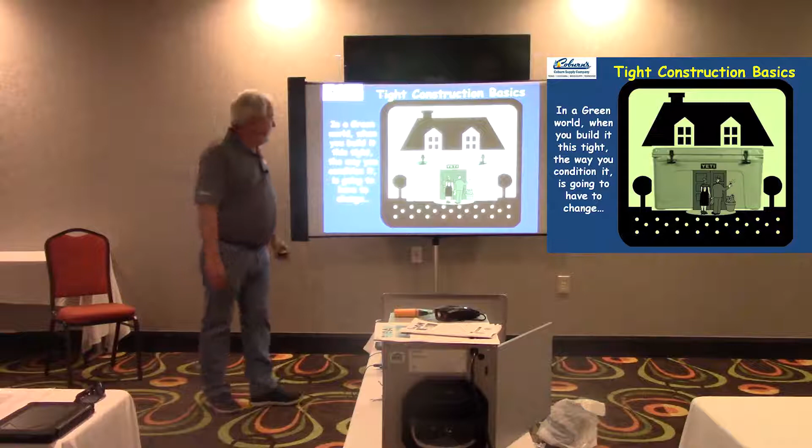All right, tight construction homes. When we start building our homes like a Yeti ice chest, the way we condition that home has to change. We can't do the same thing we've done in the past. You start living inside of a Yeti, and it starts getting nasty pretty quick if we don't do our jobs properly.

We're in the HVAC business, is that right? Heating, ventilation, and air conditioning. How often have we been doing that ventilation part, the V part of HVAC? We haven't been doing a good job with that part. I just want you guys to understand that. So if we're not doing the V part of HVAC, that means we're just hacks—oh no, we're not hacks. That's not what we're going to do.

But let's think about this. If you go out fishing and come home, take the fish out of the ice chest, rinse it out, close it up, and put it on a shelf, after about a month what's that ice chest going to be like on the inside? Mold, mildew, all kind of stuff. But if you take a towel, fold it in half, fold it in half again, and lay it on the edge of that ice chest, close the lid and leave that gap around the top for ventilation—what's going to happen in that ice chest now? It's going to dry out.

So what you're telling me is that the mold and mildew happen from the moisture on the inside of our Yeti, is that right? Not so much the outside, which we were more concerned about in our previous lives—now it's the moisture trapped on the inside that we need to take care of. So you figured out over time that if you fold it, and fold it again, maybe one more time, you have a certain amount of ventilation air required to keep it from molding and mildewing, is that right?

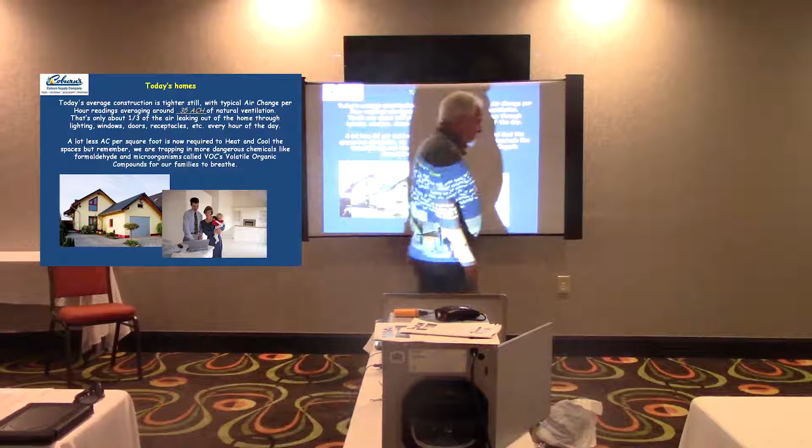Typical home of today, we're down to about 0.35 air changes an hour - about 1/3 of an air change an hour inside that home just leaks in and out. That's what we call the house breathing. That's nice. You start getting into extra tight homes or foam homes, we're down to about 0.1 air change - about 1/10 of an air change an hour inside that home. We're getting tight. Now, I'm a Cajun and I'm not a smart man, so I had to put these numbers together and figure out what this really means to me.

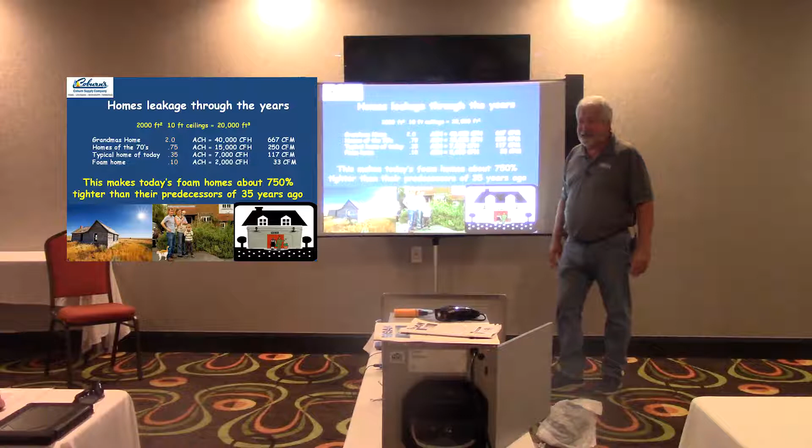So I built one house, 2,000 square feet, 10-foot ceiling. With one home, that's 20,000 cubic feet inside that house. If Grandma's home leaked 2 air changes an hour, that's 40,000 cubic feet an hour. Divide that by 60 minutes in an hour, that's 660 CFM.

That's a 1.5 ton blower in Grandma's window blowing 24 hours a day, 365. Is it any wonder we had to put a 3-ton window unit in that little 800 square foot home just to take care of the living area? We had to oversize air conditioning dramatically just to compensate. The only way we're going to be able to change that is to identify it with a blower door test, and we'll cover that here in just a few minutes.

So how can I change that natural ventilation rate? Well, wind can change that. If I have a prevailing wind blowing against a stick construction home, it might leak through the sill plates, the windows, around the doors, all of those places, because the wind's pushing on there. What you've got to get in your heads is for every 1 CFM that goes into that house, 1 CFM goes out. For every 1 CFM that goes out, 1 CFM has to come in. Remember that, because that's going to be huge.

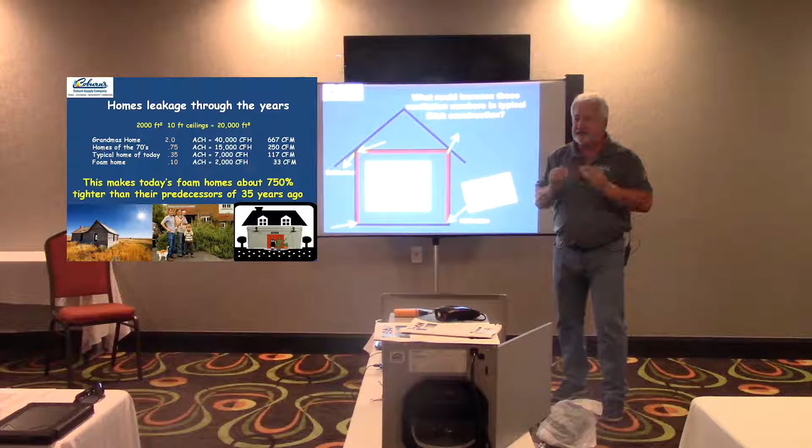As we start tightening up these homes, what happens to the size of the air conditioning system? It goes down. Our tolerances are getting less and less. We don't have that extra tonnage to take care of stuff anymore. It's going to get more and more critical. The wind, as it's blowing in, is pushing it out, so it's going to increase that leak rate.

Exhaust fans. If I start turning on the bath fan, there's 50 to 80 CFM. If I have 50 to 80 CFM going out, that means I have 50 to 80 CFM coming in.

Let's turn on can lights, especially on the 2nd or 3rd floor. Heat travels from hot to cold. As that heat rises up to the 2nd or 3rd floor, it runs right through those can lights. You know the can lights I'm talking about, where you're standing up in the attic space looking at the can light, what do you see? You see the floor, absolutely. You can get about 30 CFM through a can light, and some of these homes have tons and tons of them.

Attic accesses, you know how leaky those are? Heat travels hot to cold, moisture travels wet to dry. It's pushing everywhere. The dryer is something that's not thought about very often, but it's huge.

How many of you guys got kids at home? When does the dryer shut off? Never. So if it's not shutting off, that's 200 CFM being exhausted out of the house. If I have 200 CFM being exhausted out, that means I have 200 CFM of hot, dirty, humid air coming in. The home naturally breathing, we said, was 100 CFM. Now you turn on your dryer and you've doubled the amount of moisture being brought into that house.

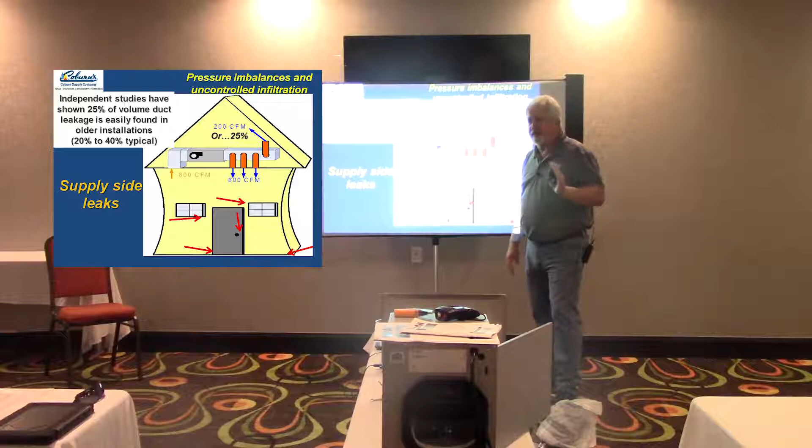Pressure imbalances can come from the ductwork. This is where it all started. Independent studies have shown 25% duct leakage is typical. We found 20 to 40% typical down the East Coast and West Coast. It was just phenomenal, the amount. If I have a 2-ton system with 4 ducts, and one of them is completely disconnected, that's 25% duct loss.

We wouldn't stand for this if we walked into the attic and saw this. But because they're all small holes everywhere, we've been letting it go for years.

So 200 CFM blowing up into the attic means I have 600 coming in the house, 800 leaving the home. If I have more leaving than coming in, the home goes into negative pressure. The home sucks, absolutely. So the fix is to put 800 CFM in and take 800 out, because our air conditioner doesn't make air, it just circulates the same air over and over again.

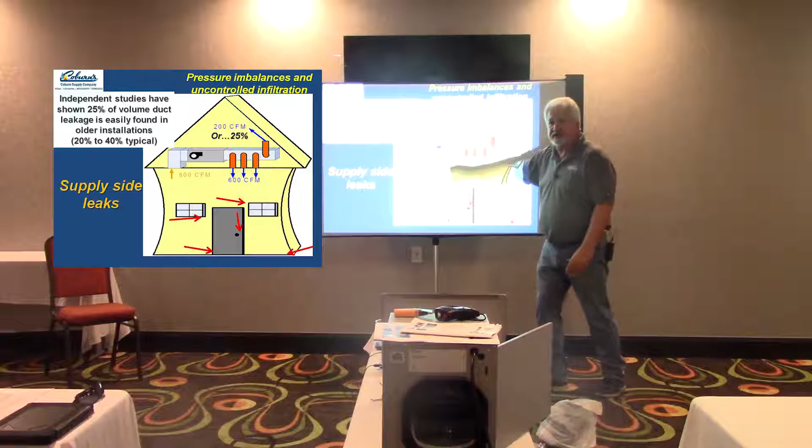If we had this same situation on the return side, let's say I have 100 CFM of leakage around a return joint, I'll take 100 from there, I'm only going to take 700 out of the house. If 700 comes out of the house and 800 goes in, the whole home goes slightly positive.

So if it's going positive, it may be good, it may be better, but I have to be very careful of where I take my makeup air from, or my ventilation air from. I don't want to take it from a 140-degree attic. Does that make sense? Good.

Which one would produce dust inside the home? A negative pressure home or a positive pressure home? I'm positive it's both, because if I'm in a positive, I'm sucking the dust in from this spot. Is that right? If I'm in a negative, where am I sucking the dust in from?

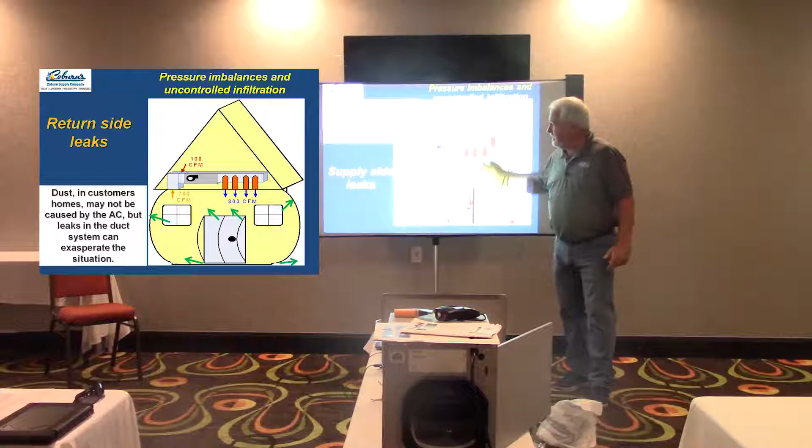Both are going to produce dust. The air conditioner doesn't produce dust. It's just that when they shut those doors, the air conditioner blowing into that room now makes that room go into a positive pressure. If that room goes positive, it's going to start forcing the air out through those can lights, through the cracks in the walls, floors, ceiling, everywhere. It's going to force air out.

If I'm forcing air out on this side, what's happening on this side of the house? The whole home just went negative. So the entire home is now sucking moisture in and heat and dirt from the rest of that house.

Where do we say we're going to get the air from? We always say, oh, we close the door, so where are we going to get the air back to the return from? Under the door, yeah, right?

Yes sir. So that positive pressure is like, I know in my home if I close the door and it's almost like slightly closed, it's going to close. Absolutely, that's the pressure imbalance. Because if I slightly close that door and I'm pressurizing that room, what's it going to do to that door? It's going to close that door. You got it? Good. So now you can hear it going under the door, right? You know why it whistles? Because it doesn't know the words.

Quit that, all right. So we got a pressurized room. If it's going under the door there, it's going through the can lights, it's going out the windows, it's going everywhere but back to that return. Whatever I lose on this side of the house, I'm going to suck in from that side of the house.

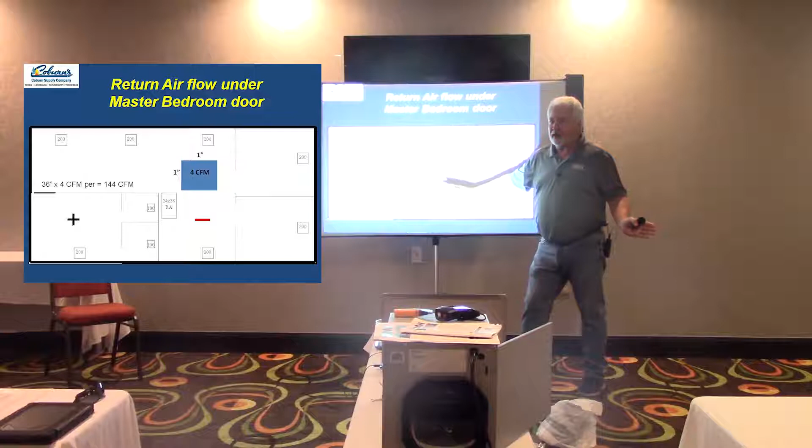Okay, so you want to have a little bit of privacy, so you close that door. But now it's not just 200 CFM going in there. Now I've got the 200 for the master bedroom, 100 for a closet, 100 for the bathroom. I've got 400 CFM, and we said that we're going to have it go underneath the door. Is that right? So we cut the door.

And the industry standard is what? One inch. Yeah, we cut off one inch off of the bottom of the door. I need you guys to understand that one inch is definitely not enough. You know that it's not enough.

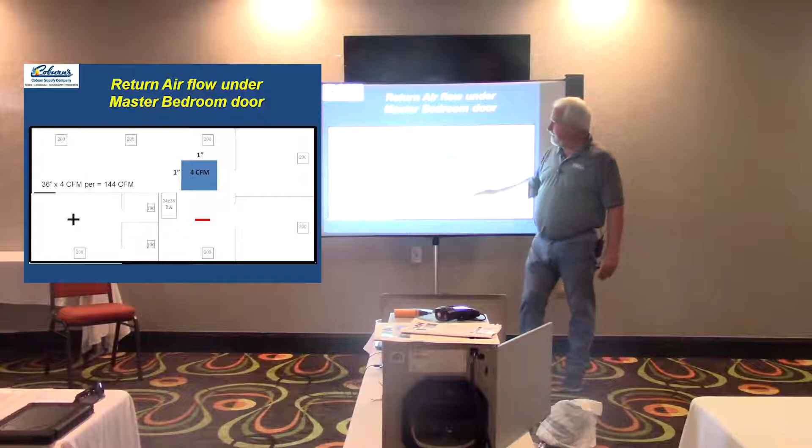But if it's not enough, how much is enough? For every inch you cut off, you're going to get 4 CFM. Real easy to remember: 4 CFM for every square inch. Everybody good with that? So if I have a 36-inch door times 4 CFM, that's 144 CFM. Everybody good with that? If I have 144 that I can get through there, but I have 400 going in, what happened to the other 260?

It all got blown out on this side. If it's all blown out on this side, what's happening on this side of the house? It all went negative. Is everybody getting that? Sucking it in through every crack and crevice on this side of that house.

Every fireplace that we have comes with combustion air. The code says that if you have a masonry fireplace or a manufactured fireplace, you should provide that combustion air. Now we've got a big old roaring fire, and you guys know that it takes a lot of air for that big roaring fire. Do you think I can get anywhere near that much air through a 4-inch duct? No. So the problem is we're putting in the duct, but on every one of those manufactured fireplaces, you know what there's an option of?

A little blower. A blower that provides combustion air that you put right here. You know what's never installed? The blower. So I can get enough combustion air if I put the blower there, but I can't get enough combustion air if I'm just trying to bring it in there.

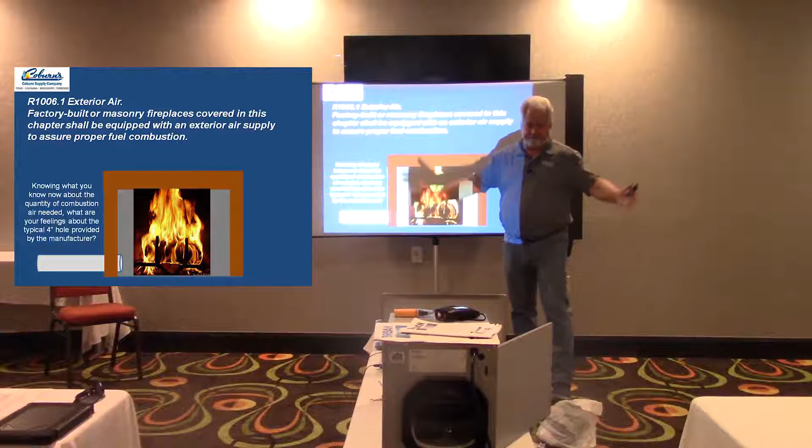It's sucking combustion air. As it's sucking that combustion air into the fire, where is all that air going that I just heated up for combustion? Right out the flue. Is everybody getting that? So if I have all of that air going up the flue, what's happening on the rest of that house?

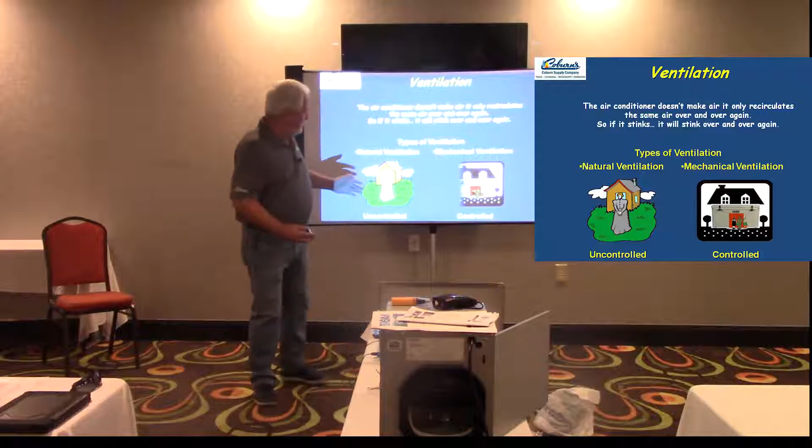All right, so ventilation. We talked about Grandma's home, that being uncontrolled and natural ventilation coming in from everywhere. As we tighten up our homes, whether it's foam or just tight construction, we're going to have to start bringing it in controlled. We're not going to have the house breathe on its own anymore. We're going to have to put it on a respirator, and we're going to control the amount of air going into our homes. Bring it in controlled.

You have to bring in mechanical ventilation when it starts getting less than 3 air changes an hour in the state of Louisiana. So, wait a second, 3 air changes an hour? Grandma's home was 2.

When we start talking about air changes an hour now in the codes, they are talking about using a blower door on the house. So if I take a blower door and set it in that exterior door and start sucking the home into a negative pressure, if I had a 0.35 air change an hour home, naturally just leaking in and out, one-third air change every hour, and I suck it into 50 pascals, 0.2 inches of negative pressure vacuum, what's going to happen to the leak rate?

It's going to go up. It's going to leak faster. Does that make sense? So that 0.35 air change an hour home might be 7 air changes an hour under 50 pascals of negative pressure, under a vacuum. Does everybody get that? Good.

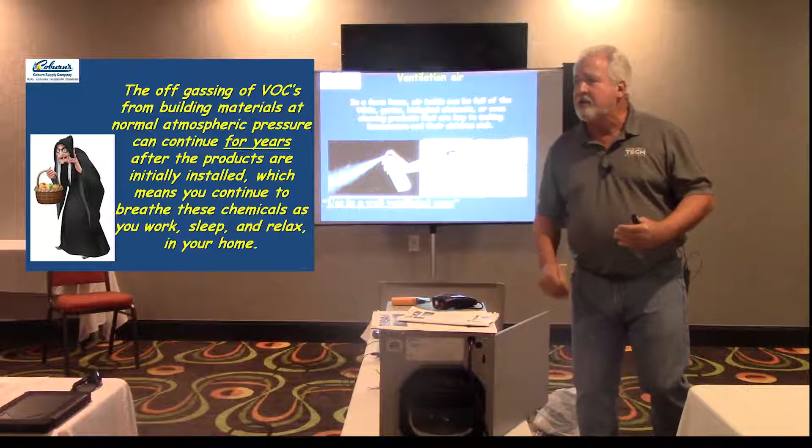People up north have figured this out a long time ago. We're just starting to see it now. Please, please be careful as we go forward. We have to ventilate that home. The off-gassing of these things continues for years, and it's faster in hot environments and humid environments.

Where do you guys live? Hot and humid. So it's going to off-gas very quickly, and it's going to start pushing all of these chemicals inside the house. And it's maybe not necessarily just harmful to you, but it's harmful to the equipment in that home as well. Anybody seeing any of the cans starting to rust out in the attic spaces in some of those foam constructed homes? Oh yeah.

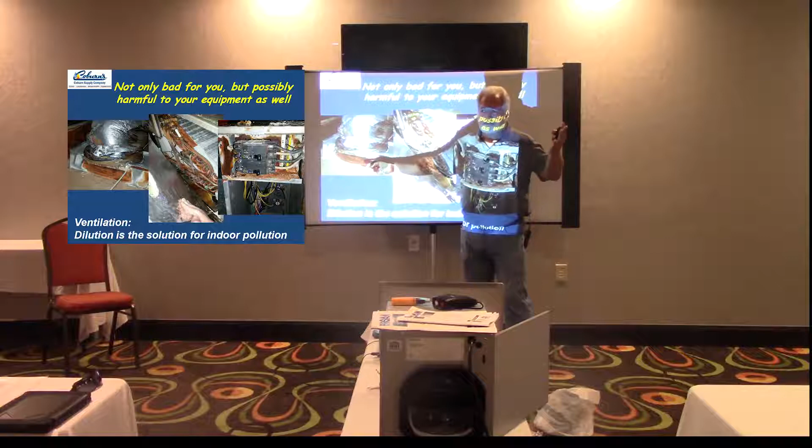So anywhere that it reaches dew point, anywhere that I can get that air leakage down where it's starting to get a little bit of dampness to it, what's happening is the chlorides that are in the home, whether from the chemicals they're using to clean the house, or chlorides that are off-gassing from the VOCs, are going throughout the house. Wherever it reaches dew point, it's rusting.

When does your coil not reach dew point in Louisiana? It's always wet. We're running into coils, you're getting 4 and 5 and 6 coils in a 5-year period. It's not the coil, because you're using the same coil next door in a ventilated home, and you're not seeing the problems. As soon as we start seeing those chlorides starting to come into play, the chloride's in the air, and then it mixes with the moisture, and it becomes chlorine.

And the chlorine is now causing the rusting happening. Nobody's ever seen this happen with the breakers, have we? Yeah, because it's reaching dew point. On the hole, or right there on that grommet where the electrical's coming in, right? Absolutely, it's got to be sealed up. Because otherwise I'm bringing in the moist air, and it's coming right into this cold environment. We've lowered the temperature, reaching dew point, and the chlorine is just tearing up this equipment.

What is it? It has to have the moisture in order for it to start doing damage. What is your body made of? A lot of moisture. So start thinking that one through as we start going forward. I'm thinking that probably you need to start adding ventilation air, and a certain quantity. And how often? Continuous. Yeah, I think continuous.

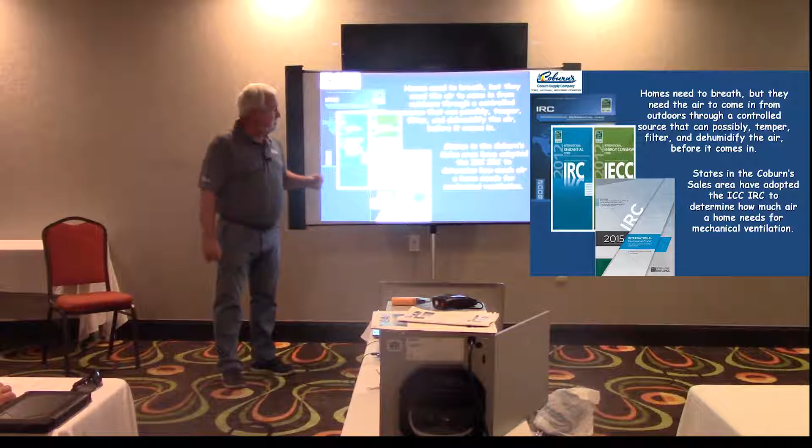Somebody much smarter than you and I decided exactly how much ventilation air you need in a house of this size in order to keep that home from molding and mildewing, and keep the carbon dioxide levels down and the carbon monoxide levels from picking up. They wrote it down in the codes from 2009, 2012, and now 2015. We're still following the 2012s in here and some of the stuff from 2009. In 2015 and 2012, they say this.

The building or dwelling unit shall be tested and verified as having an air leakage rate not exceeding 5 air changes an hour in climate zones 1 and 2. Climate zone 1 is down in Miami, we don't worry about that. Zone 2 is the vast majority of where we're at, so we can't have more than 5 air changes an hour. Upstate Louisiana says 3 air changes per hour in climate zones 3 through 8. What we've decided here in Louisiana is to put the entire state under climate zone 2, so we fall under that 5 air change an hour maximum. That's where we should be - maximum leakage rate of 5 air changes an hour.

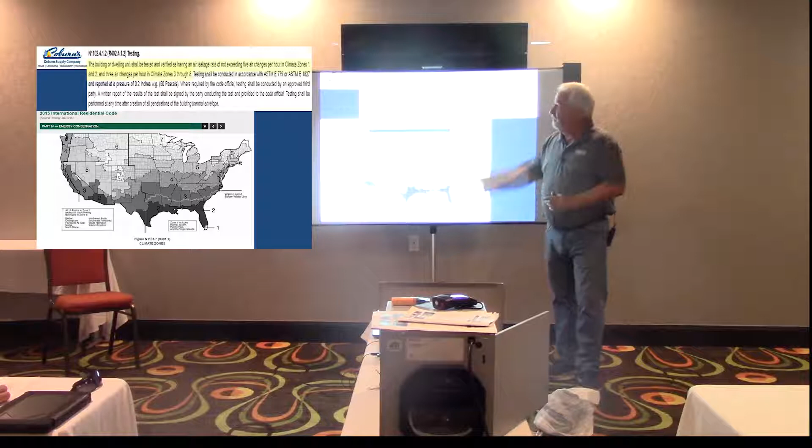But we step back to 2009, and under 2009 we're allowed 7 air changes an hour. So we said okay, we're going to still be able to build the house leaky. Under the 2009 code here in Louisiana, we don't have to have it tested and verified - all we have to do is have the inspectors do a walkthrough and say yep, it looks tight. For them to do that job properly, they need to be on the job site about 7 times during the installation of that stuff. So it's tough for them to do that, but that's part of the code. That's what they're allowed - they either do a blower door or this walkthrough inspection.

So from our perspective, we would like to see a blower door test done on every new construction home. Why? Because you're doing a manual J saying the house is going to be this leaky - I know it's going to be 7 air changes an hour maximum in this house, so I'm going to do my manual J on the front end and size my air conditioning to my home. But if they don't do a blower door test, they could be at 9 or 10 air changes an hour. It could be leakier or it could be tighter - so we don't know what our leak rate on that house is, and we don't know what size air conditioner we need to put in. So we're trying to say, let's please put a blower door on every new construction home so we can set it and everybody knows what we're dealing with.

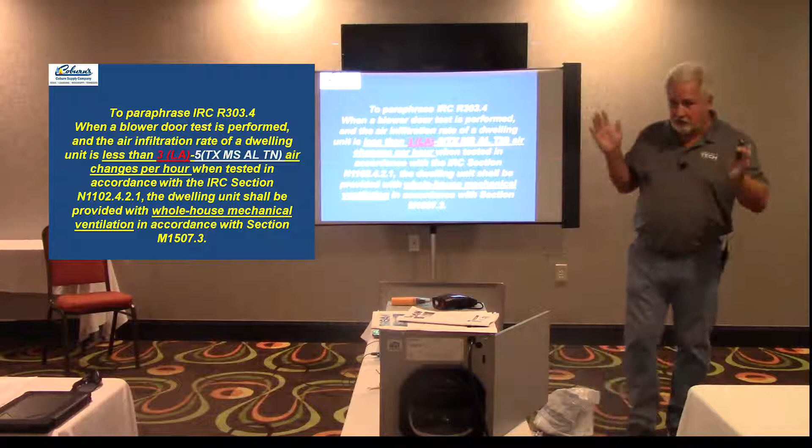So then it says, if you're doing a blower door test on the home - and Louisiana changed it from 5 to 3 - and the air infiltration rate is less than 3 air changes an hour, you have to provide mechanical ventilation. A typical foam constructed home would fall out at about 1 air change an hour, so you'd think every foam constructed home would require mechanical ventilation. Doesn't necessarily fall that way, but that's what you'd expect. So if we're getting into those tighter homes and it falls out at less than 3 air changes an hour, you're required to - but you don't ever know that until after the job is well under way.

So this is all discussion that needs to happen on the front end. I'm going to provide mechanical ventilation because I believe you guys are going to build a tight construction home, and it's going to be less than 3 air changes an hour - I need to provide that ventilation air. Because if I don't provide that ventilation air and that lid stays closed on that home, what's going to happen inside?

Mold and mildew, right? That's the biggest problem we have. Going into a house, you don't know if it's foam. You're doing a rough-in on it, you have no clue until you go back to the final to find out that the whole house has turned into an ice chest, but they're only bringing in 4 inches of outside air, and there's no mechanical ventilation in the house except for a fart fan, a dryer, the kitchen hood, and a fireplace. That's the only ventilation you have in this home.

And it's getting even worse because now they're putting exhaust fans in the laundry rooms with dryers, so all the conditioned air you dump into the laundry room is getting sucked out, plus the rest of the house, out the door, because there's not enough air coming in to supply an exhaust fan and a dryer.

Same problem with us too, because you go sell them air conditioning and they change the foam. You're already stuck in it, you got to sign a contract, so you have a problem. Now we're all understanding, so that's what I'm saying.

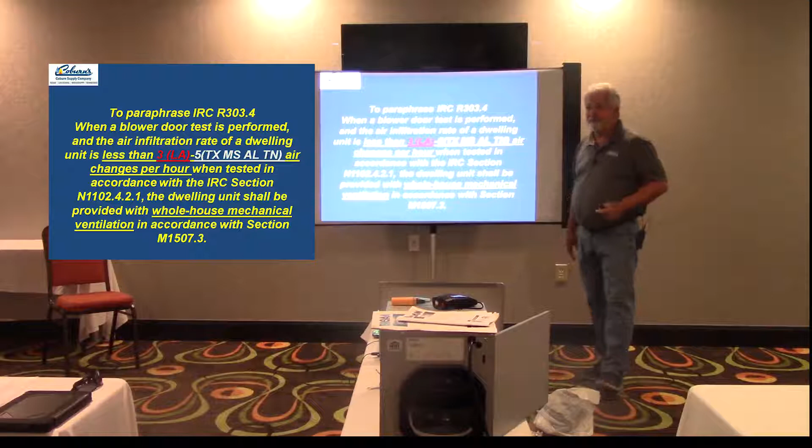We're going to talk. We're going to talk, because that blows my budget out. Good, we're going to talk about all the options we have going forward, guys.

So what is code? Code is the minimum that we have to do, right? This is insurance. The code is the minimum, and air conditioning contractors are responsible for all mold, mildew, and everything that ever happens inside of somebody's house. Is that right? Correct. It's always us because we got the biggest insurance policies.

That's how it works. So understanding how to prevent it, how to talk about it, and how to get codes actually amended is your responsibility. So we need to get you guys all talking the same talk.

So the blower door, it's called the envelope test. We're going to take the exterior of that home and seal it up as tightly as we possibly can. We're going to suck that air out down to 50 pascals of negative pressure, or 0.2 inches of water column. And when I do that, if I'm sucking air out, that means I must have leakage coming in. Is everybody okay with that? So the more leakage I have coming in, the more I'm going to suck out. It's just how it works.

So if I find out that home is 7 air changes an hour, 5 air changes an hour, what if it's only 3 air changes an hour? What am I now required to do? I have to bring in a mechanical ventilation system. Absolutely.

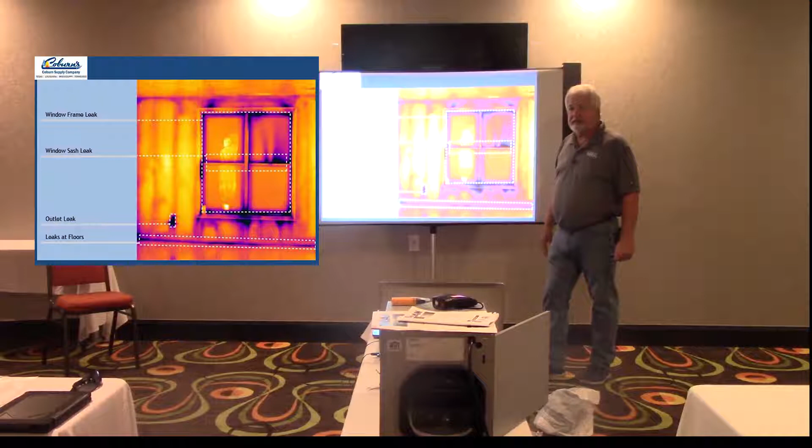You're seeing it's being brought in there as well. So by using thermal imagery, I know where the heat is either coming in or leaving, and at the same time, I'm also able to figure out if heat's coming in, dust is coming in, and moisture is coming in as well. Is everybody getting that? Cool.

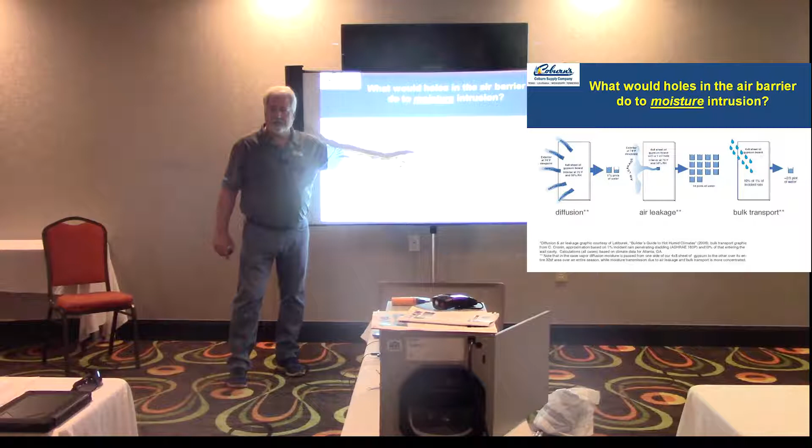Okay, so let's compound that. Now you have these 1-inch holes everywhere in your house, and let's make that house go negative. What happened to that 14 pints of water? It went up dramatically. Is everybody getting that? What did we do to the size of our air conditioner on our newer homes? Went down. The moisture removing capability has been reduced, but the moisture we're fighting now is inside that house.

Is everybody getting that? So here's the rules. And the problem with the rules is people typically only read the first one and then they run away. So here's the dig. The first one says system design.

It says outdoor air ducts connected to the return side of an air handler shall be considered to provide supply ventilation. Okay, so it's saying if you just take a duct and tie it to the outside and to the return, you're good to go, right? If you stop there, that's what we're seeing out there in our industry.

Problem is you have to read the next two codes. The next ones say you have to have controls that enable a manual override and a method of airflow adjustment. So we have to have a damper in there to control it from 60 to 80 to 90 CFM, manual adjustment, and we have to have controls that can turn it on and override it. Does that make sense? Okay.

The next one is the more important one. It says provide outdoor air at a, what does it say? Continuous rate. What does continuous rate mean? When does continuous rate turn off? See, that's what we read up here - when the air conditioner shuts off, ventilation shuts off. Down here it says it doesn't shut off. Continuous ventilation.

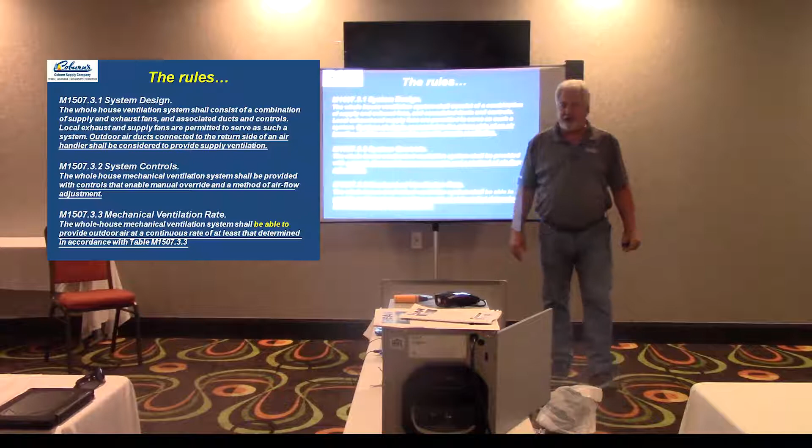Now that would be like saying, oh okay, well we can get ventilation when we want to. So we'll open the lid for Grandpa for a little while, but then when we feel like we want to shut it down, we'll just shut it down. I mean, we'll wait for him to get sick, and then we'll open it back up again. Is that making sense? That's what we said in the state of Louisiana because we added this. Instead of shall provide, we added shall be able to. Shall be able to - when we say shall be able to, that means you have to put in a ventilation system to be able to have that air for Grandpa, but you can turn it on and off whenever you feel like it.

You have to provide that. Who's going to turn it off and take responsibility for Grandpa? But that's what the state's telling us we can do now. So I just need you guys to understand why 'be able to' was added - so that we wouldn't be bringing in all that humidity, because if you bring in humidity, what else do you have to put in? So do you think somebody was concerned about how much it's going to cost to build that house? That's why they put this in. Okay, so I'm fighting that right now at LSUCCC.

All right, so does everybody understand what the codes are actually saying here? The problem is we've been just taking that duct and slapping it on the return side of that system. When the unit cycled on, we brought in fresh air.

What did we do to the runtime of those units when I tightened up the home and now have less requirements for air conditioning? What did I do to the shoulder seasons? I don't have the runtime during the shoulder seasons I had before, is that right? So if I don't have the runtime of the shoulder seasons, I don't have the ventilation happening. Does that make sense? Are we still producing humidity inside the house?

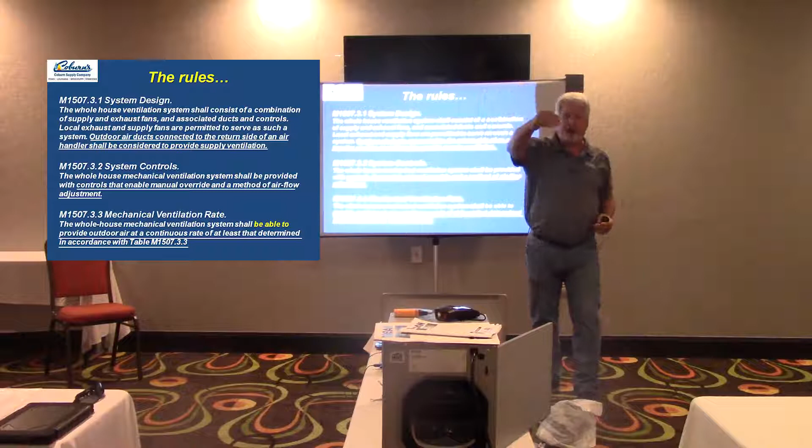That's really it, it really is. And so that's why we're having these conversations. Because if you keep a dehumidifier running 365 days, you're still pushing CFM into the house without it coming out. But I have to, right? But I have to - is it coming out? If I bring in air through a dehumidifier or through some sort of ventilation system, if I'm bringing air into that house, is it going out? Yes. Is it? It's going out through the dryer vent. Right, when you exhaust. It's going out through the bathroom vents. Absolutely. So as I pressurize that house, going to a positive pressure, it's still going to find its way out. Every CFM that I bring in goes out. Yes. Cool. All right, so how much?

The code says go to M1507.3. M1507.3 says if I had a 2,000 square foot home with 3 bedrooms, I'm required to bring in 60 CFM. Now remember what I said about that typical home - that 0.35 air changes per hour was about how many CFM of breathing? About 100 CFM. Remember that? I said a typical home breathes about 100 CFM. So what we were comfortable with it breathing 100 CFM, now we're saying, oh okay, but if we bring it in through a controlled source, we're down to 60 CFM. So we're not bringing in as much as we had leaking before.

If I had a 4,000 square foot home with 4 bedrooms, I'm looking at 90 CFM. Is everybody okay with that? Good, all right. So that's telling us exactly how much we have to have. It's telling us exactly how many folds I have to have in that towel to have just enough air to keep that mold from growing inside there.

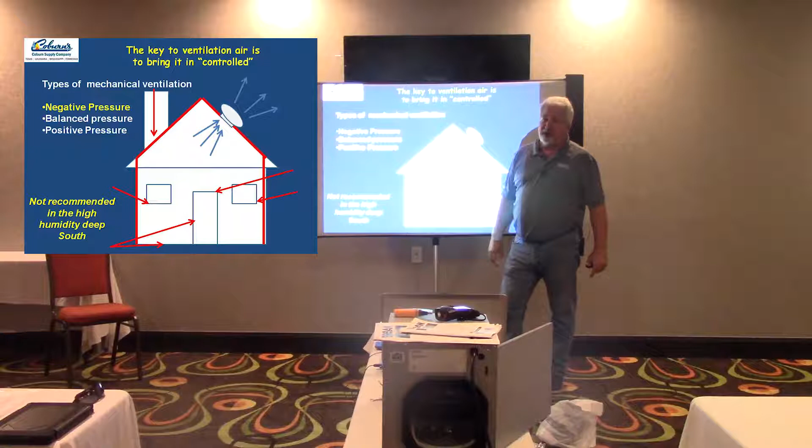Let's think about negative pressure ventilation. Let's call this a tight home, and we have 60 CFM being exhausted out of that house. Where did I get 60 CFM? If I'm exhausting it out of that tight house, where am I getting 60 CFM? Every penetration, around those windows, around those doors, around those bathroom ventilators, around everything. Is everybody getting that?

Well, here's the problem. If I'm sucking it in around that window casing, and this is, let's call it an open cell foam house, I'm going to take hot, dirty, humid air and run it along the side of that window or door casing right next to that open cell foam. What do you know about open cell foam and moisture? Like a sponge. So I am running moisture across a sponge.

How often? Continuous. So that moisture is going to start to build up into that open cell foam until 3 years, 4 years, 5 years down the road, it is saturated enough to start now producing mold and mildew. Is that right? That is why we're not dealing with negative pressure ventilation inside these homes.

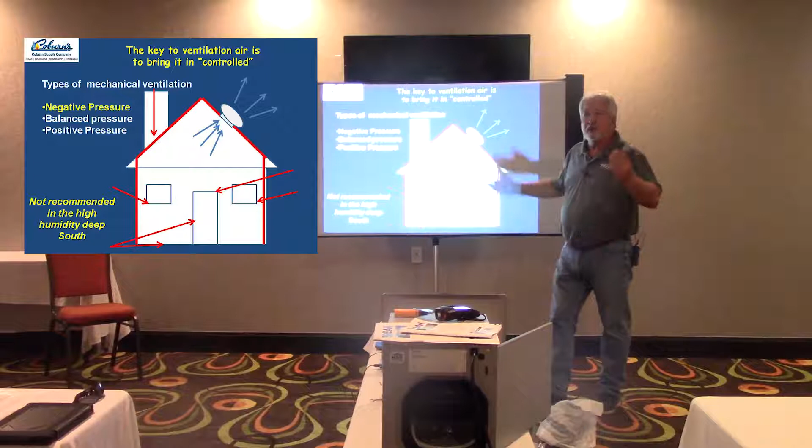Gentlemen, let me ask you this. What is a kitchen hood? What is a dryer? What is a bathroom ventilator? Ah, okay, so all of these things are negative pressure ventilation, and that's what's happening in our deep south. We just made the air conditioner smaller. We're using all forms of negative pressure ventilation. And when we do that, huge amounts of humidity are being brought into the home with the air conditioner not being able to compensate. Is everybody getting that?

Balanced pressure, exhaust fans are negative pressure. We're going to have to start controlling the moisture at its source. When do you typically turn on a bathroom ventilator? And then they turn it off. When you get out of the shower and it's filled with fog, is when we typically start seeing that the fan gets turned on.

Now, if it's filled with moisture, remember, heat travels from hot to cold, moisture travels from wet to dry. You have this whole room full of fog, and it's the master bathroom. What's adjacent to the master bathroom? Master bedroom. So if I have this fog and it's wet inside that master bathroom, where is that fog going to go?

To the driest thing inside that room, which is the master bed, right? Sucking it into the sheets, sucking it into the mattresses, just sucking it all in there. When do you turn off that bathroom fan? When you leave, because mama slapped you on the wrist and said turn off those fans, turn that stuff off.

Gentlemen, we have to start making conversations, start having recommendations and saying, look, there are ventilation fans out there with humidity controls on them. As soon as you turn on that shower and the humidity starts hitting it, it's going to automatically come on and stay on until the humidity drops back down again. So you can leave the room and know that it's going to cycle back off. If they already have existing fans, the controls are able to replace the switches on most of those fans, so you can get humidity controls from there.

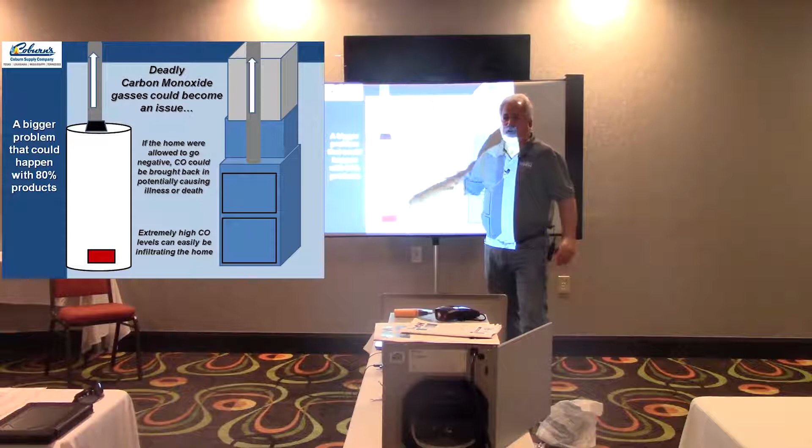Because right up at the top, or right down at the bottom, there's usually rollout switches. So as it starts bringing that hot gas back down, that rollout switch trips, right? That limit trips and shuts down the water heater. The plumber goes back out there and he resets it or he replaces it, right? He does that 2 or 3 times under warranty, is that right? Then what happens after that?

You know what happens after that. What happened? He unplugs it. He bypasses it, right? Because it's just a nuisance trip. The whole time we're sucking carbon monoxide back into that home. And it was fine as long as it was grandma's home, but now we're in a tighter home. In the tighter home, where does that carbon monoxide go?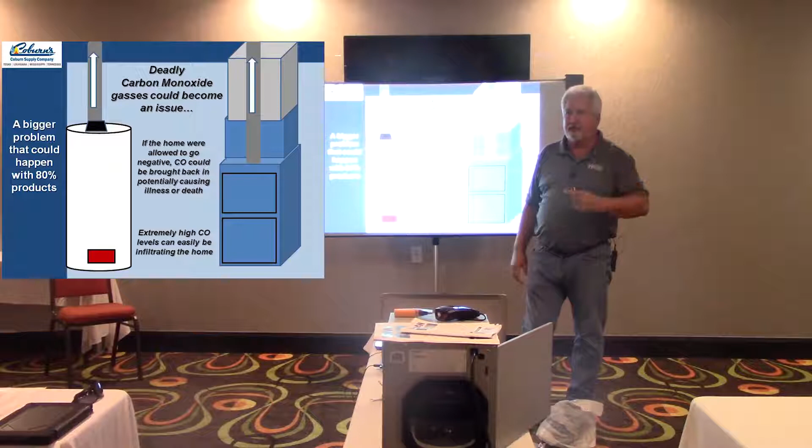Over and over and over again. Is everybody getting that? You're going to start seeing people get sick. And I'm out there like Chicken Little screaming this out there, saying the sky is going to fall, the sky is going to fall. You guys please understand the sky is getting ready to fall. You don't want your customer to be that customer. All right?

So balance pressure—balance pressure are those ERVs or HRVs. What we're going to do on an HRV is take cool air. HRVs are used up north, ERVs are typically used farther down south. HRV: I'm going to take cold air from outside, run it through a heat exchanger, and bring it inside. I'm going to take the warm air from inside, run it side by side through that heat exchanger, and exhaust it outside—same quantities. So if I'm bringing in 50 and sending out 70, I'm going to heat up that 50-degree air to maybe 60 degrees coming in. Is everybody good with that? It's strictly sensible temperature, strictly temperature on an HRV.

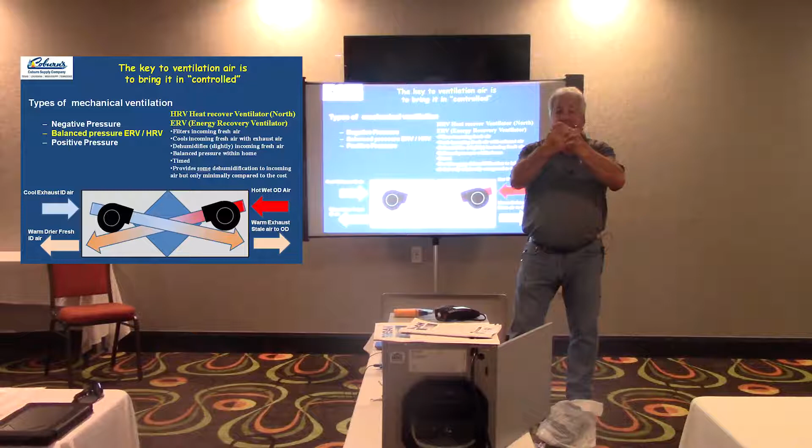An ERV is the same thing, except it has an enthalpy heat exchanger—let's call it a very porous heat exchanger. Moisture travels from wet to dry. So if I'm bringing in wet air from outside and sending out dry air from inside, that wet air is going to wick its way through that heat exchanger to the dry air, and instead of bringing all that moisture in, I'm going to send some out. Now the problem with that is the efficiencies.

HRVs are typically in that 60-70% efficiency range. When you start reading on the ERVs in our marketplace, you see that same 60 or 70, but they're rating it under the HRV mode, only on the sensible side. You have to read deep into their literature to find the efficiency on the ERV side, and it's typically about 27 to 30% efficient. When you see that, the amount of money you're putting in to remove a little moisture coming in far outweighs the effects of an ERV.

So that brings us down to positive pressure ventilation. We've been getting away with positive pressure ventilation using this particular product. It's an electronic control that we can override. It ties into a duct tied to the return from outside, so we have an electronic damper for override—that's the control we talked about. We also have a mechanical damper that we can adjust to get that 60, 80, 90 CFM, and it's tied to the return air.

The problem with this is, when does that blower cycle off? When does your blower cycle off if we're satisfying code? Never. It's continuous. So how's that working out for your customer? Probably not so much. So if it's going to be on continuous anyway, why do they have an electronic damper here?

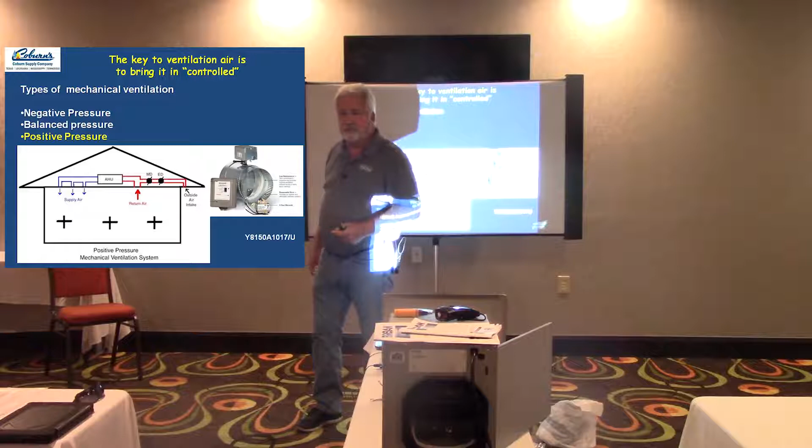And possibly when the damper—when the blower is running, but maybe, not necessarily. You follow what I'm doing here? We're saying Grandpa's going to sit inside that ice chest, and he may or may not get ventilation air for the vast majority of the year. Where did that mold and mildew get its moisture from—outside or inside that ice chest? It was the inside we were concerned about. We needed to leave that gap at the top, and a certain amount in there, not just some.

So the next thing we can do is not turn on that air handler. Let's get something that has its own blower. If we do something like that, we can use the Broan FIN 180P. This is it, and it's been running this entire class, blowing out that 60 CFM—actually 90 CFM—of air right now, so that's what you're hearing.

But what am I doing? I'm taking that air from outside. I'm not running it into my air handler where I'd have wet air coming into the back of that air handler mixing with the cold air there. I'm running it into the plenum. When I run it into the plenum, when does this blower shut off? Never. 24/7, 365. It's code.

Yes, sir? Wouldn't that increase moisture in the supply? Boy, nothing slips past you guys. I'm telling you, y'all are awesome. Yes, sir, it does. It will start increasing that moisture inside that home. Because right now, the only thing that removes moisture is my air conditioning system, is that right? And when is that running? A lot less, because now we have a tighter home, and a smaller air conditioning system.

So this can satisfy the code. The code says this doesn't shut off, right? The 180P that we've installed here for you has the ability to run as code, where it never cycles off. Or it's got a comfort condition available as well. I can flip it to comfort, and now it's going to go back to those ASHRAE standards where it cycles on and off when it gets hot and cold outside. So it's going to decide when Grandpa needs to get some air in his ice chest. Not the greatest setup at all.

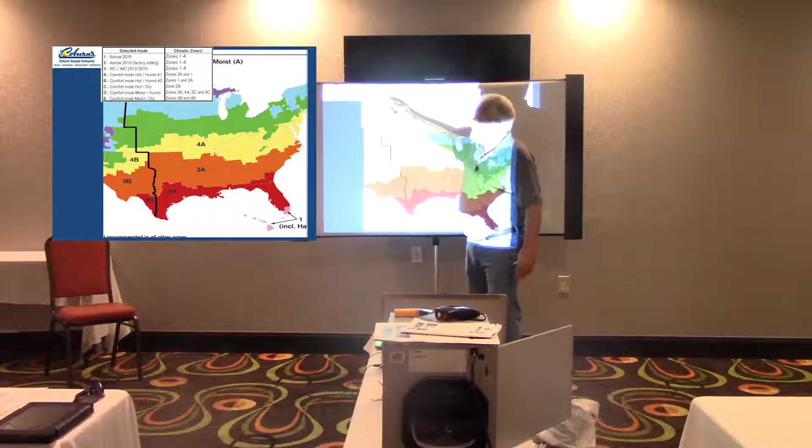So here's that selection. When you go from the code to the comfort, you have these settings inside there, just a little dial. You're welcome to look at that at break. There's the ASHRAE 2016, which is about twice as much as the ASHRAE 2010. Again, these are standards. Number 3 is the actual code - the IMC 2012-2015.

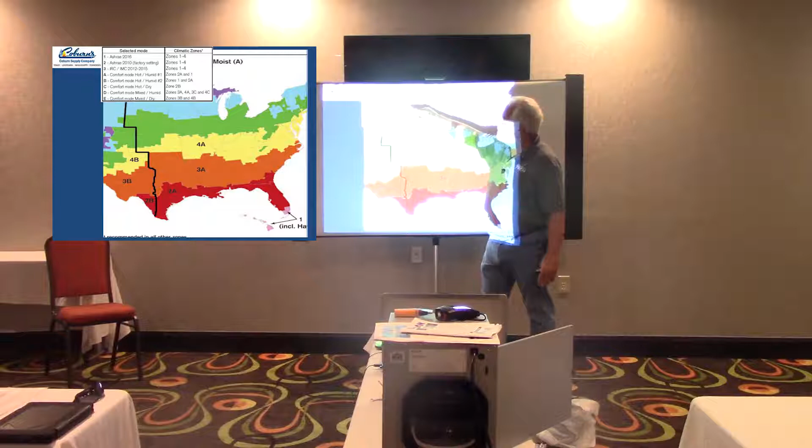When does it shut off if I'm on selection number 3? Never. So then what you can do is say, okay, I want it on comfort - I don't want it to bring in all this humidity all the time. You are allowed to go to zone 2A, which is where we are right here. You find zone 2A, and you're able to turn it to switch A or switch B. You're allowed to shift it to that.

When you do that, what's going to end up happening is we're going to have the amount of air - that's that 1, 2, 3. We're having it in here, and then you can switch it to A or B if you wanted comfort. You have 2 speed settings, 130 or 180. At 180, if I needed that 90 CFM, I'm going to put it on 50% of the time. 50% of that 180, I'm going to get that 90 CFM. Is everybody getting that? So we'll select it that way.

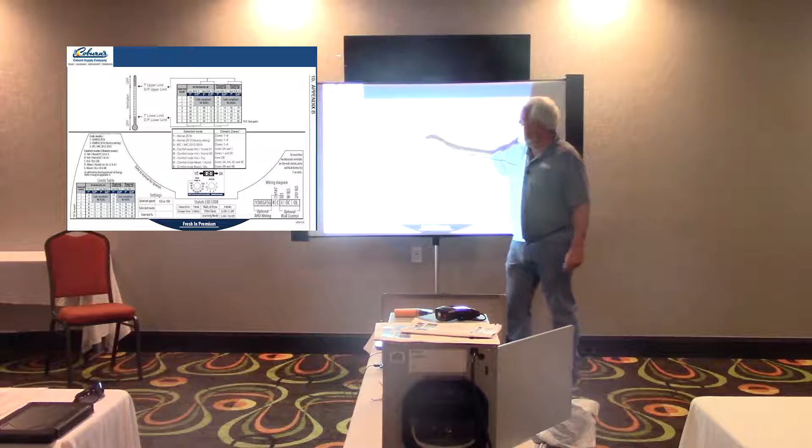Now, if I do go into the comfort mode, and I go to A or B, with no thermostat calling for it because we have it separate from our air conditioning system, anytime my dew point gets above 73 in A or above 75 in B, it's going to shut down.

How often is your dew point above 73 or 75 in this marketplace? All the time, and I get that. So that's what I'm telling you - 90% of the time, Grandpa's not getting any air in there. What's going to start happening inside that box? Grandpa's going to get moldy, is that right? Absolutely. We're going to see some issues there.

So understand what this is capable of doing. We're selling a lot of this out there in that Texas market now because they wanted to find something that satisfied the code but still was able to be changed. And I need you to understand what that means - continuous means all the time. And they say, well Rick, it says that it's ASHRAE 2010. That's fine, ASHRAE 2010 is a standard. It's not the code. The code is what you guys have to follow.

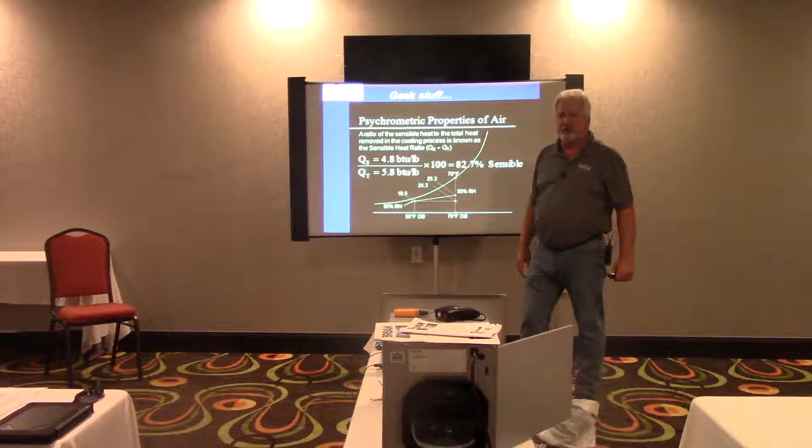We are in a huge wet market. How many of you guys have psychrometers? How many of you actually take them out of the truck? Okay, we are in a huge wet market.

We have to understand psychrometrics because thermostats are not showing us what we need. We're thinking, oh, we got the dry bulb temperature, we got relative humidity. You're going to find out here today that that is definitely not the only thing you're going to be trying to take care of. So a psychrometer, guys, just a basic handheld one is way better than not having anything at all. It's 60, 70 bucks. Please get one and start understanding the wet side of this business, because that's where the problem's going to start coming into play.

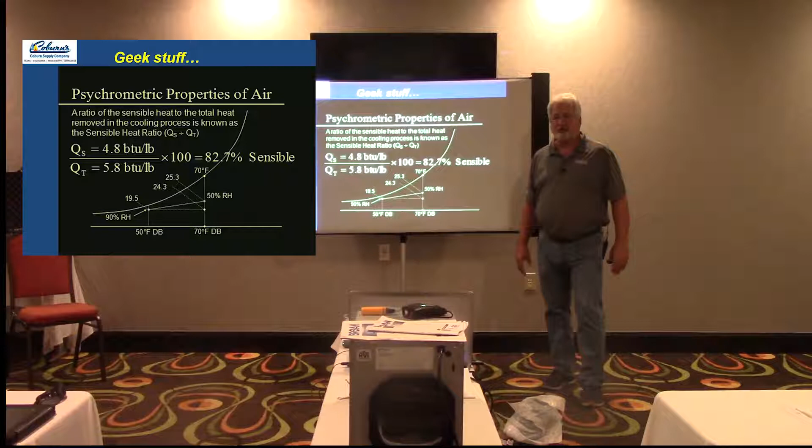I was just talking to the young man back there, and I said the biggest problem you guys are going to start facing as young technicians coming into this business is that moisture is going to be the bigger part of what you guys have to deal with. So let's get into the geek stuff a little bit, let's get into psychrometrics. What can we identify with psychrometrics? Well, dry bulb temperature, that's something we've been dealing with for years. We kind of understand that, but we need to understand its limitations. Dry bulb temperature - if it's 90 degrees in Phoenix and 90 degrees in New Orleans, where's it hotter?

Because there's some other heat in there besides the dry bulb temperature that we're feeling, is that right? And what is that heat? Moisture, humidity, absolutely. So it doesn't tell you the total quantity of heat, it only tells you the level of heat. So 90 degrees in Louisiana is a lot harder to cool off than that 90 degrees in Phoenix.

Your air conditioning system typically has a 75-25 sensible-latent ratio. 75% cools temperature, 25% of that system removes moisture. So typically, as it's running, it's doing a 75-25 sensible latent ratio. It used to be 70-30 back when I was younger. When I was your age, it was a 70-30.

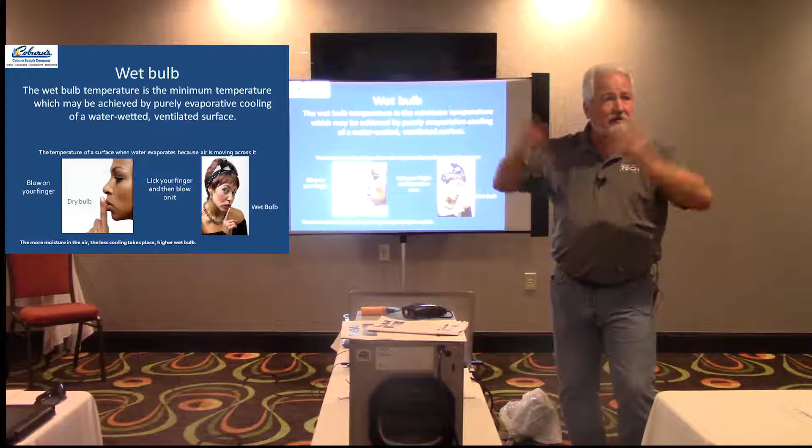What I need you to do is blow on your finger. That's dry bulb temperature. Lick your finger and blow on it again. Was it cooler? That's wet bulb temperature. That's the temperature at which that water is evaporating off of your finger and into the air. The drier this air is, the faster it evaporates off. So the lower my dew point, the lower my wet bulb temperature.

Is everybody getting that? If my wet bulb temperature and my dry bulb temperature were exactly the same, that means the water's not evaporating off. That must mean this air is saturated, 100% relative humidity. So when my wet bulb and my dry bulb are the same temperature, there's a lot of moisture in the air. When my wet bulb and my dry bulb are really far apart, that means it's really dry in the air.

Good. So wet bulb is my better indicator of the total heat that's in the air, the amount of moisture as well as the temperature. Wet bulb temperature, that's what we should be dealing with a lot more of.

If I know how many BTUs there are in the heat going into my return, and I know how many BTUs there are in the heat coming out of my supply, I can tell you how many BTUs your air conditioner is actually removing. Does that make sense? We're going to do that here today to find out how many BTUs you're bringing in with your ventilation air.

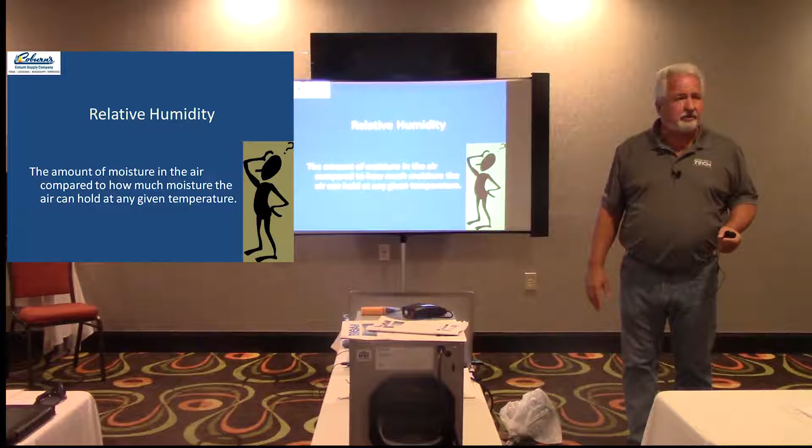Relative humidity: the amount of moisture in the air compared to how much moisture the air can hold at any given temperature. That's a funny thing. Nobody really follows relative humidity because we think relative humidity is humidity. Two completely different things.

If I had a 100-gallon bucket and I had 75 gallons of moisture in that bucket, how much moisture do I have relative to how much it can hold? 75%. So a 100-gallon bucket with 75 gallons of moisture would be similar to a 100-degree day at 75% relative humidity.

Everybody cool with that? What happens to the temperature at night? It drops down. So that means my bucket would get smaller. If my bucket dropped down to, let's call it a 75-gallon bucket, and I still had the same amount of moisture in the air, how much moisture do I have relative to how much it can hold?

100%, it's 100% relative. So if I drop the temperature down a half a degree, a quarter of a degree, an eighth of a degree, can the bucket hold the moisture anymore? No. We just reached dew point, and the bucket can't hold that moisture anymore. If I lowered that temperature enough, it's going to start running out as condensate. Does that make sense? Good.

Where in my air conditioning system would I lower the temperature of the air enough to be able to wring out the air, get some moisture, and have it run out a drain? Where would I do that? At my evaporator coil? Is everybody agreeing with that? At my evaporator coil, the water's going to lower the temperature, and we're going to run that water out down the drain. Is that making sense?

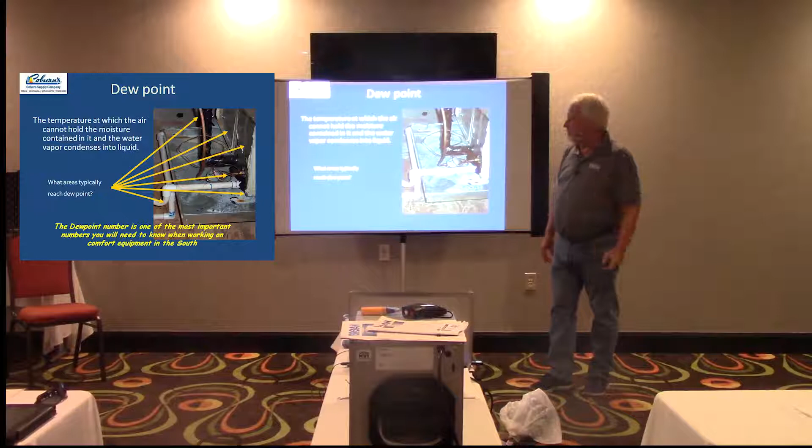Can I reach dew point if I tore that insulation on that Rubatex? Yes? This is the audience participation part. You guys good? Good. Can I reach dew point on that plenum? Can I reach dew point on the panel of that evaporator coil? Can I reach dew point just past that expansion valve? Good. Can I reach dew point on the drain line? Can I reach dew point just above that rust spot?

We have reached dew point several times above the rust spot. So anything that's below the dew point temperature can sweat. Is everybody okay with that? It can condensate - I just have to lower the temperature below the dew point temperature, and it's going to sweat.

The dew point temperature is the most important number you're going to need as you start doing this business. If you don't have a psychrometer, you're just guessing. You're only checking the dry side of the system. You're not finding out what it's removing on the wet side.

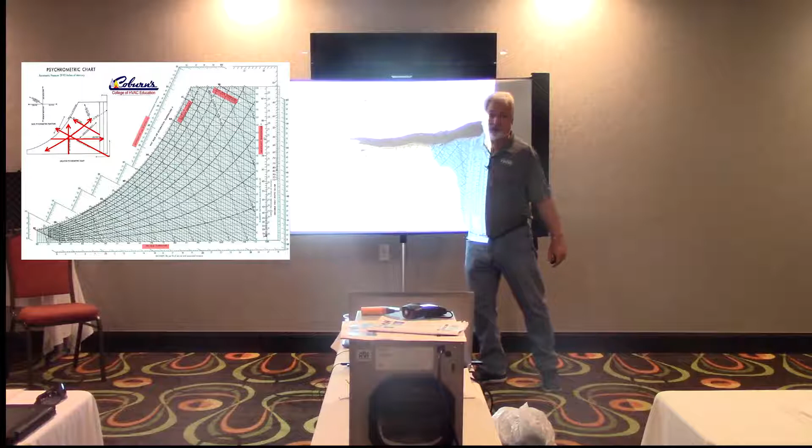So here's your psychrometric chart. Stay with me up here first, and then I'm going to get you on your charts there on the table. So let's start off here. The dry bulb temperature, just what you're going to read on the thermostat, that's down here at the bottom. You'll see it's 20 degrees over here on this side and 120 degrees on this side. Anywhere along here, if I found 70 degrees, that would be my vertical line, that would be my dry bulb temperature. Is everybody okay with that? Everybody understand where dry bulb is?

All right, the next one we're going to look at is wet bulb. Wet bulb is going to be the ones that go off at an angle this way. When they go off up at an angle, you're going to see 70 degree wet bulbs, 65 degree wet bulbs, 60, 55, 50 degree wet bulbs, and you would make a diagonal line. Everybody good with wet bulb?

All right, the next one we're going to look at is enthalpy. I told you wet bulb was my best indicator of the total amount of heat, and enthalpy was total heat. Remember that one? Okay, so if I took my wet bulb number, let's call it 65 degree wet bulb, and I extended it out to my enthalpy line, it matches up with what?

About 30? Does everybody see that? Good. So that's 30 BTUs for every pound of air. If I have a 65 degree wet bulb, I have 30 BTUs for every pound of air. Does everybody see that? Okay, good.

That's enthalpy. The next one we're going to look at is relative humidity. Relative humidity are the curvy lines here. You'll see down here at the bottom one, that's 10%, 20%, 30, 40, 50, 60, 70, 80, 90. And this last curvy line right here is called our saturation line. It's 100% relative humidity. Everybody good?

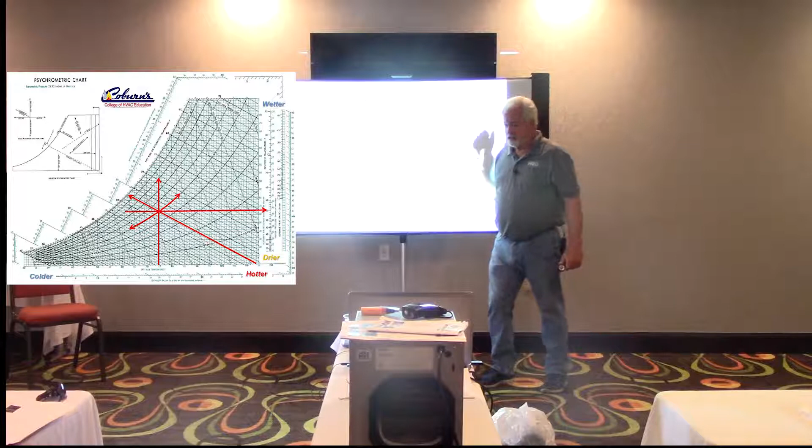So here's where it gets tricky. What's the temperature of the air coming out of your supply air ducts?

52, 54 - we better start looking at that a little bit closer because we're going to have to pay attention to that, because anything lower than a 55-degree dew point is going to sweat. So if I'm running 56-degree air out of that duct and it's a 55-degree dew point, is it going to sweat in those grills?

Not if it's 56 coming out and 55-degree dew point, it's not sweating, is it? But if it was 54-degree air coming out of there, is it going to sweat? Absolutely it will.

Okay, so what about that grill that's by the front door, and the kids are in and out all summer long? So it's 55-degree dew point in the house, but every time they open and close that door, that 75, 81-degree dew point comes rushing in. As that 81-degree dew point hits that 55-degree grill, what's happening in that grill? Sweating. That's interesting, gentlemen.

I've got ductwork, and inside that ductwork is 55, 56-degree air, and the dew point outside is 80 degrees - an 80-degree dew point. I'm going to run that 55-degree air through that ductwork, and it's going to start to thermal wash that insulation, which means it's going to go 55, 56, 57, 58, 60 degrees when it hits that vapor barrier. If it's 60 degrees when it hits that vapor barrier, what's going to happen if I have an 81-degree dew point temperature on the other side of it? It's going to sweat.

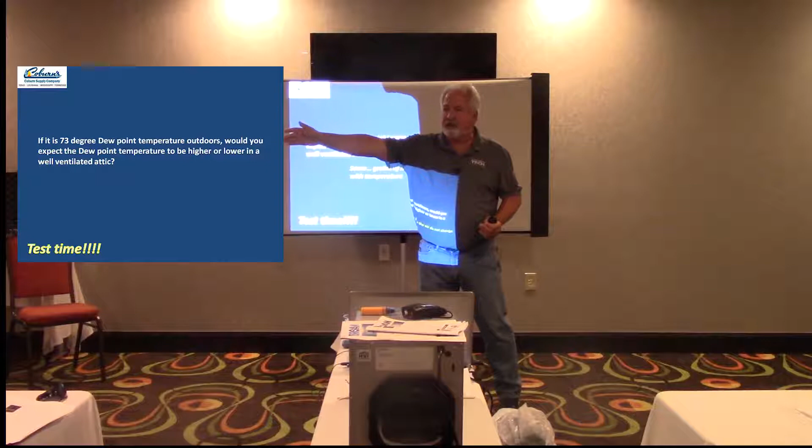So if I have an 80-degree dew point outside, what should I expect my dew point temperature to be inside? 80 degrees. If my ductwork gets below 80 degrees, it's going to sweat—there it is, guys, there it is. Got to keep the ductwork warmer than the dew point temperature. So now I have to make the attic warmer, which is very contradictory to anything any contractor is going to want to do. Yes, sir?

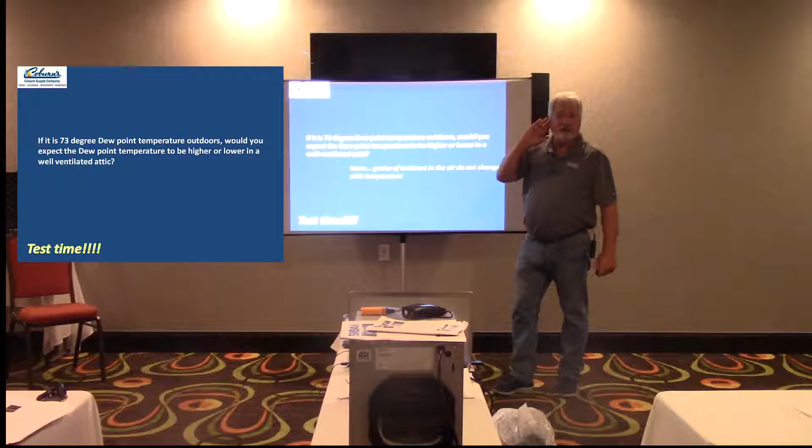So how do you handle that in a foamed house? In a foamed home, what's my dew point temperature in the attic space? So it's going to be 55 degrees, is that right? Or somewhere thereabouts—55-degree dew point in the attic space. My ductwork has to get what temperature before it finally decides it's going to sweat? 55-ish, right in there.

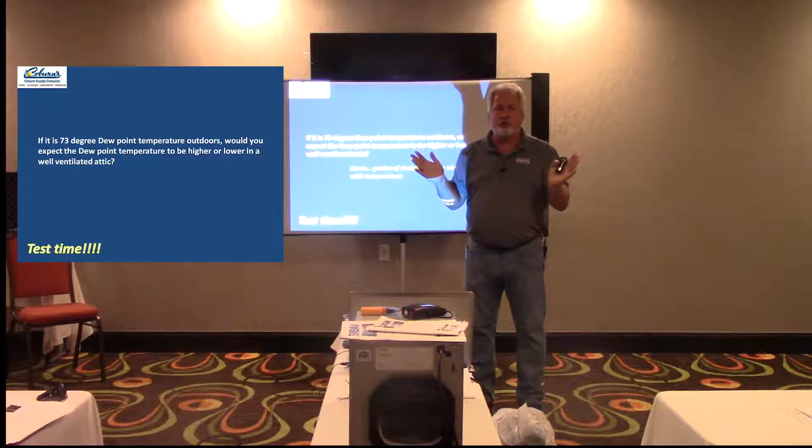Everybody good with that? So that's why it's more important to bring the ductwork into the conditioned space. That's why I tell you guys, quit putting your air handlers on a platform in that closet. Your return air temperature is at 73 degrees, and it's 55% relative. What would you expect the supply air relative humidity to be?

Oh crap, he says—I love that. Supply's going to be 100 right off the coil. It's going to be near 95% relative humidity coming off your supply. But that gets so crazy to a technician because he's saying, wait a second, my air conditioner is a dehumidifier. I should have less humidity on my supply than my return.

All we did was lower the temperature. And when I lowered the temperature at my evaporator coil, my relative humidity was what? 100%, because I was able to start getting it to reach dew point and rain out. So if that temperature is 55-56 degrees at my coil, 56 degrees coming out of the supply, and I raise the temperature just a hair, my relative humidity is going to start going down. Does that make sense to you?

Good. So that's telling me at my supply air grill, it's 95% relative humidity. Have you ever seen the mud on the ceilings right there? Yeah, and they say, oh, that's coming out of your ductwork, right? They tell you that? Newton said for every action, there's an equal and opposite reaction. So if I'm blowing air out, what does that mean going to that grill? Dust—so I'm taking dust from the floor and it's running straight up. That air is going out, this dust is coming up.

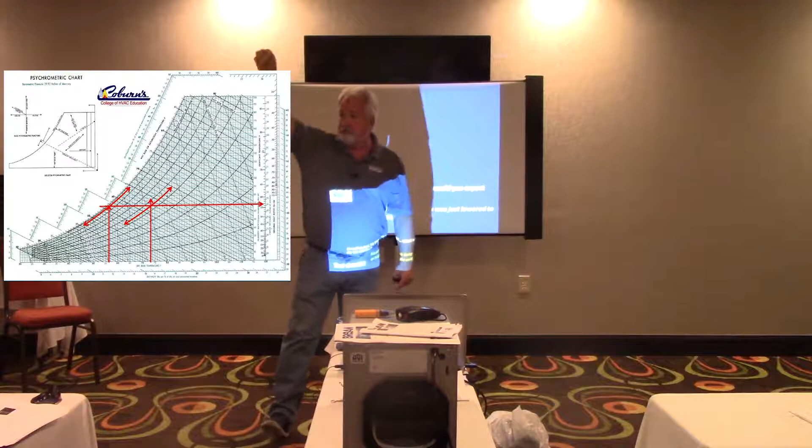So if I had that 73-degree dry bulb and 55% relative humidity, I had a dew point temperature in this house of about 56 degrees. Supply air temperature comes out at 56 degrees, I'm up at somewhere around 95% relative humidity. Is everybody getting that? Good.

It blows a lot of technicians away, and I just need you guys to get a visual on this. So total heat, this is the number I'm trying to show you, that if we get the total BTUs on a unit, we're going to find out the total BTUs we're bringing in with ventilation air. Enthalpy. Yes, sir.

So homeowner says, my unit's not keeping up, it doesn't feel like I wanted it to feel. Back in the day, we had our thermostat set at 78 degrees. Then it shifted down to 75 degrees. Then it became 72 degrees. What's that happy number everybody's talking about today? 68, 68 degrees. I'm hearing it all the time. Every class I teach, that's the same number I hear everywhere.

Now blame it on medical. They blame it on the medical field, but we don't have that many people in the medical field. It's just a bunch of people that didn't go outside because Nintendo was invented. So we have this propensity to stay inside conditioned space now, and we feel like we need to be cooler and cooler. So we've run that temperature down.

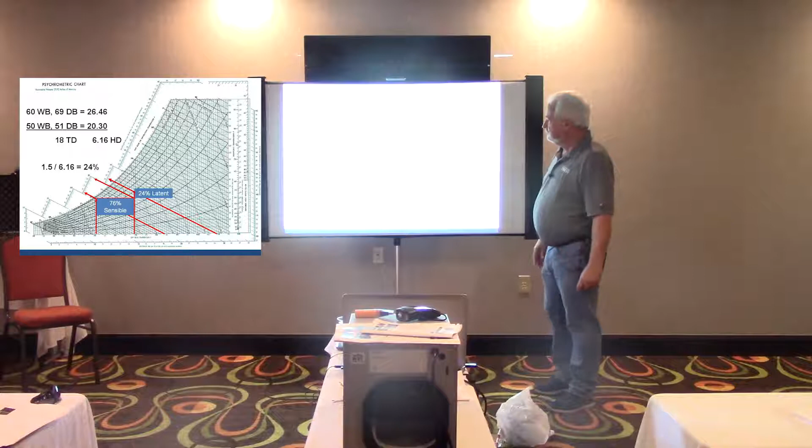60-degree wet bulb, you should see something about 26 and a half. Is everybody seeing that? There's 26 and a half BTUs for every pound of air in the return. Everybody good? Do I need to hold off a second? We're good? All right, we good?

Supply air temperature: we used our psychrometer and saw that we had a 50-degree wet bulb in the supply air. So find 50 and run that all the way out to your enthalpy line. Everybody sees somewhere around 20.3 or something very close to that.

All right, so here's the gig. While your unit is running, you had 26 and a half BTUs for every pound of air in the return, and you have 20.3 BTUs for every pound in the supply. That means that air conditioning system removed 6.16 BTUs for every pound of air that ran through there. Everybody good with that so far?

All right, so the formula is CFM times your HD, your heat difference, times 4.5, and that's going to be the total BTUs that system is removing. 4.5 is a constant that never goes away. And if you ever forget this formula, just plug in the two wet bulb temperatures into that calculator on the Coburn's chart, and we will be able to provide that information for you. Okay?

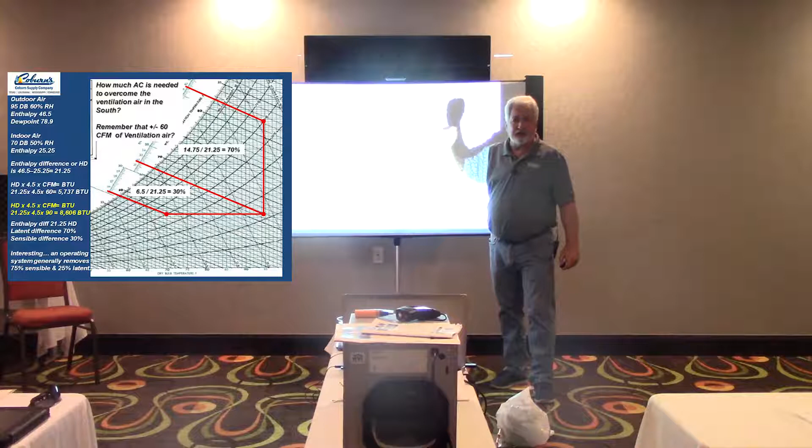But she's not happy with that, because you're going to now check the supply air and return air temperature, not just the wet bulb. And in that case, with that same wet bulb you had for supply and return, she has a 69-degree return air temperature. Is the system working? Because she wants it at what? She wants it 68, and she's got a 69-degree return air temperature.

The unit's not keeping up. She's aggravated. But you have to be able to prove capacity. So we're going to prove capacity. When we do this, you see that she's got an 18-degree temperature split. Everybody good with that? So we're going to plot this here.

We just drew that 60 for my return, and I'm going to take my 69-degree dry bulb and draw a line straight up here. Everybody good with that? So right now, this intersection is my return air set point. Everybody good with that? Everybody know what I'm talking about?

Okay, we're going to take our 50-degree wet bulb for our supply and draw that line out. And what's my supply air temperature? 51. Find 51 and draw a line straight up from there.

Everybody good? I told you on this chart, this was what? This was our moisture, is that right? This was what, temperature, right? Temperature and moisture. So watch this.

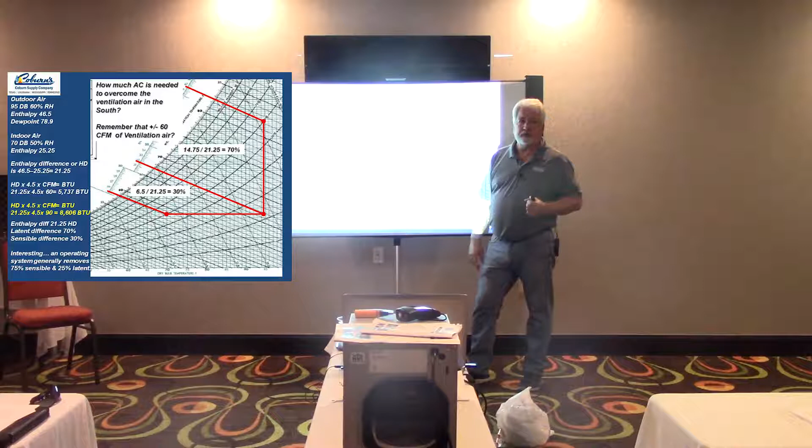That's cool, because now what you guys are going to be able to do is start proving what your sensible and latent of that high efficiency equipment that you're buying.

Because let's stop and think of it at a very simple level. If I had a two-stage unit, the compressor is typically 100% and 66%, is that right? When it drops from high to low on the fan speed, it's 100% down to about 75%.

So I'm running a 66% compressor and a 75% fan. Am I moving more air across that coil than I would have before? If I'm moving more air across that coil, what just happened to the coil temperature? It went up. If it went up, what do you think is going to happen to this sensible latent?

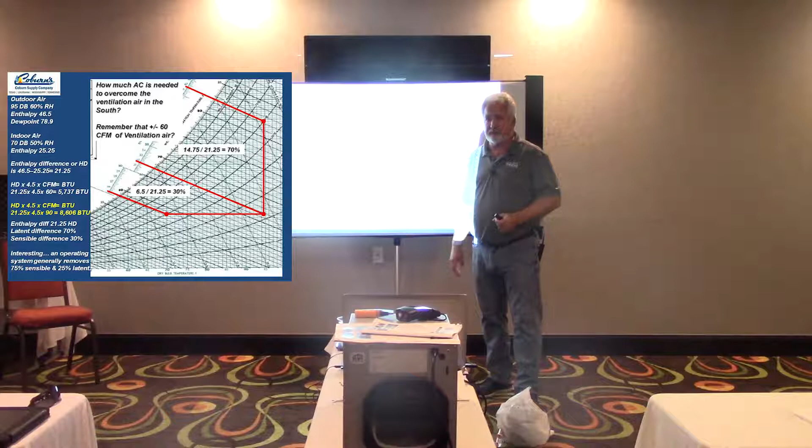Okay, so why did we go through all of that? We went through that so that we can figure out how much moisture am I bringing in, how much heat am I bringing in with that 60 CFM from outside?

Let's take a typical day in your market. Let's call it 95 degrees, 60% relative humidity. That means I have a dew point of 78.9. Is that a typical summer day in your marketplace?

Not here? What's your typical dew point temperature here? Average, 75 was your average, and high was 81. Is that right? We're at 78.9. Is that a summer day? It's a summer day.

So a 95-degree dry bulb, 79-degree dew point temperature, I can have that, is that right? Good. What does she want inside the house? Let's call it 70 degrees, 10, 20, 30, 40, 50% relative humidity. Everybody good with that?

This is your HD, this is your heat difference that you're bringing into that house. You had 46.5, 25.25. The difference between there is 21.25. Everybody follow that so far?

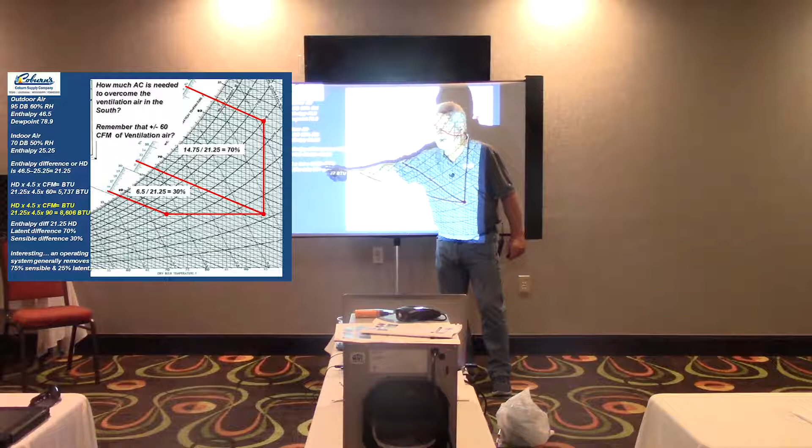21.25 times my 4.5 times my 60 CFM, I am bringing in 5,700 BTUs. How much is that? 5,700 BTUs, half a ton, right? If it was just a half a ton.

Half a ton, but when we ran this angle out here, we have now figured out that I have 14.75 here divided by the 21.25. 70% of what I'm bringing in is latent heat.

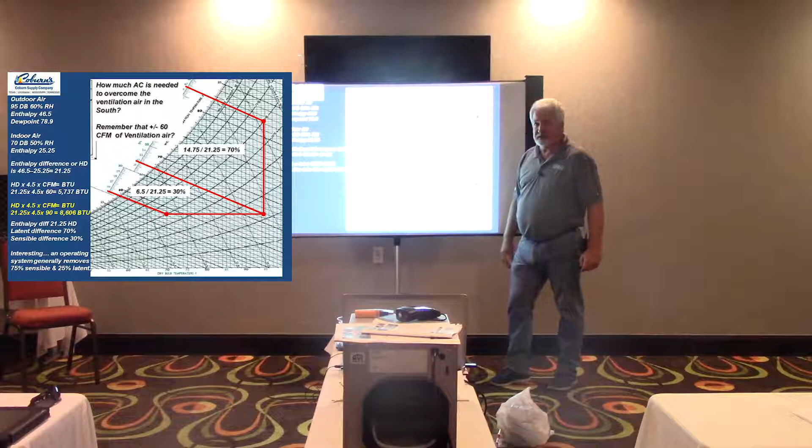You guys getting that? 30% of what I'm bringing in is sensible heat. So I'm bringing in a lot of what? Moisture. Your air conditioning system removes 75% sensible and 25% latent, and I'm bringing in 70% latent and 30% sensible. Does anybody see a train wreck waiting to happen?

Because when does that ventilator shut off? It's continuous. By code, it says it's continuous. Absolutely. So we are bringing in a lot of moisture here.

Remember that other house, that bigger house, that 4,000 square foot home? We said how much air did that one need? This one needed 60, the other one needed 90. Okay, so 90 would be the same. That house is next door, so it's the same outdoor conditions. They still want the same 70 indoor. So the conditions are going to be exactly the same, except it's going to be 90 CFM.

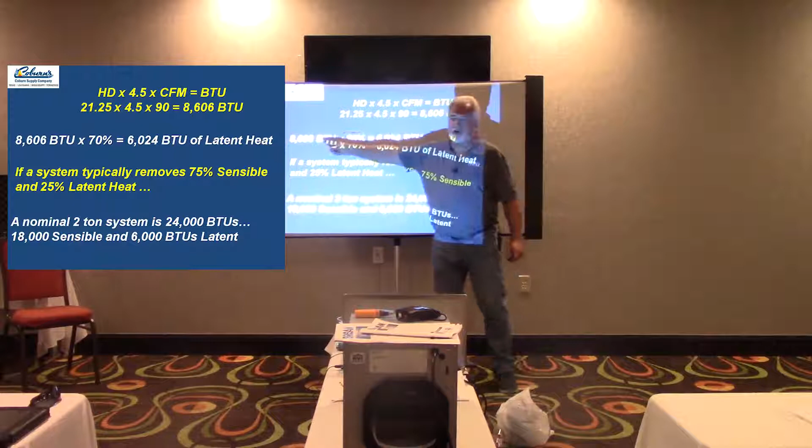What are they bringing into their house? 8,600 BTUs. Watch this. 8,600 BTUs total times your 70% latent means I am bringing in 6,000 BTUs of latent. That's a half a ton of latent air. Your air conditioning system removes 3/4 sensible, 1/4 latent.

If I have 1/2 ton of latent coming in, how much air conditioning do I need to compensate? Half a ton of latent, I'll need 1 ton, 1.5 ton, 2 tons to be able to compensate for that. Does everybody get that? I have a half a ton of latent that I'm bringing in.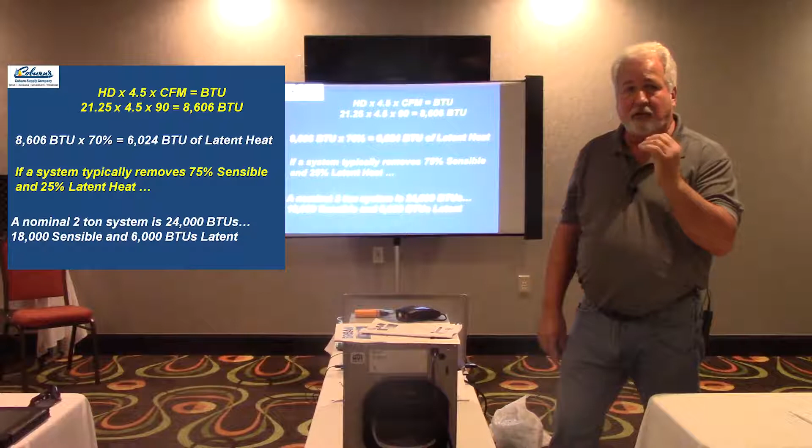And that system can remove 75% sensible, 25% latent. I need 2 tons to be able to remove that. So as that blower is running, I need to be able to remove 2 tons. I have to add 2 tons of air.

What? Didn't we just make the air conditioner smaller? We just made it smaller. We're not going to be able to remove that moisture. Is everybody getting that? All right, good.

So it's going to take a 2-ton system to compensate for that 90 CFM of ventilation air just because of the latent heat, not so much just because of air that we're bringing in. Sensible heat's easy to remove. It's that latent that's hard for that air conditioner to remove. So I need to add 2 tons.

Man, that's just incredible. But let's take it one step further. We said that we have a lot of pieces that are in that house that do negative pressure ventilation, and when they start exhausting stuff, we have to bring in hot, dirty, humid air.

Let's call it a dryer. If that dryer turns on, when does it shut off? It doesn't, okay? So that dryer is going to move 200 CFM if it's just a standard dryer. You start getting into the big boy dryers, it's going to be up into 300 CFM. That's twice as much as your house used to breathe.

200 CFM times your HD times your 4.5, I'm bringing in 19,000 BTUs being sucked into that house. 70% of that is going to be latent in our particular case. That's 13,000 BTUs of latent because of the dryer.

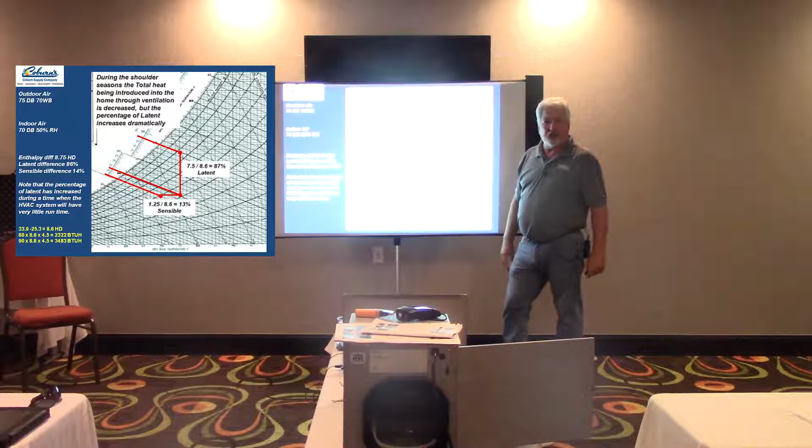We're going to take this and run it down and run it across. We're going to take this and run it out at an angle. When I do this, your enthalpy difference is 8.75, latent difference is 86%. Gentlemen, 7.5 here out of the 8.6, 87% of what we're bringing in is latent. It's what? Water. We're bringing in 90% water with this thing running.

When does it shut off? It doesn't. If I'm bringing in this on a day that's 75 degrees, how much is your air conditioning system running? It's cycling on and off based on sensible temperature, is that right? It's on that dry bulb. I'm bringing in tons and tons of water, and it's not seeing it as heat. It's cycling on and off very, very sparingly.

Everybody getting this? If there was only something that I could bring in that fresh air from outside and not have the air conditioner run, but still be able to remove the moisture. God, what would we call that? Dehumidifier. Guys, that's exactly right.

If I take a dehumidifier, bring the air in from outside, run it into the dehumidifier. I will still take air from inside the house, run it into the dehumidifier. Blow that into the supply plenum. Now listen to me, your dehumidifier is going to produce some heat. There's the heat of compression from your compressor, and there's the heat of the fan motor in there running too.

You'll typically see about a 10-degree temperature rise from the return to the supply. So if I have this just blowing in the house, it's going to be about 80 degrees blowing into that house. Somebody's going to get real upset. So you blow it into the plenum space so that it can mix with some of that other air. Is everybody getting that? Good. So if I'm getting it mixed with that other air, now it's going to come out a little bit less.

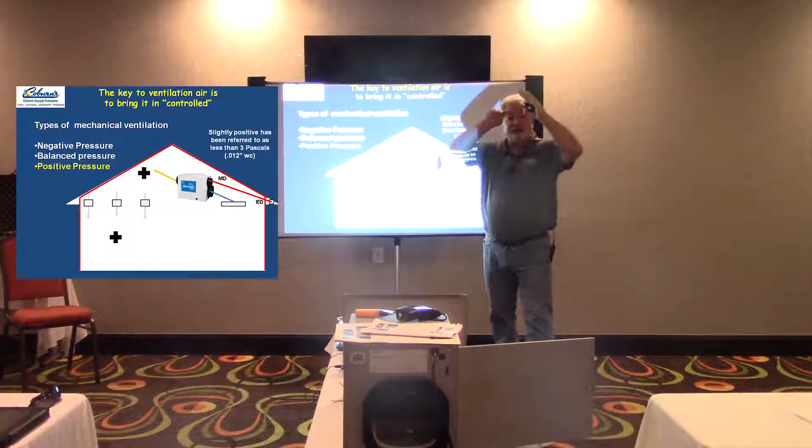All right, I think that's a great place. If you have a cathedral ceiling, where is the wettest spot in that entire house? The top of that cathedral. So you take that supply duct and stick it right there at the top of that cathedral and blow it straight across there, because I'm going to take that and mix up that moisture so I can get it to change states and mix back into the house.

Is everybody getting that? If you have that huge stairwell in that foyer up front and it goes up 30 feet, you know what I'm talking about? Where's your cloud of moisture? Up there. Dump that back into there. Do you want it all in that space, or do you want to split it?

I can split it up a lot of different places, but I want to get that moisture off of that spot. Get that air turning, because when does this cycle off? Never. I want to get that air turning all the time so I can get that moisture back into the house, back into the dehumidifier.

So obviously if I put it in here, it's going to come here, it's going to work its way back to the return. When is this blower going to cycle off? The compressor is going to cycle on and off based on the humidity inside the space. So when it gets wet inside here, it'll cycle back on and off.

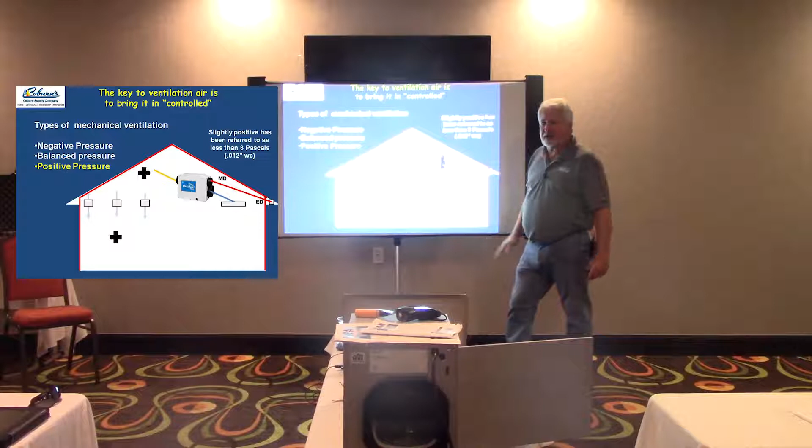That works out great. Now guys, if it's a foam encapsulated home, if the whole attic is encapsulated, here's what I'm going to tell you: don't put it into the supply plenum. Have your supply blow up into the attic space. Where's the wettest spot in that attic? Right here. If I take this air and put it back into the supply plenum, I am going to condition this. If I blow this up here, I'm going to continually change over.

The University of Austin did a study called the Ping-Pong Effect, which means the moisture rose up like a cloud. It gets sucked into the open cell foam. When it does that, the heat from the sun hits this, forces that moisture back in, and it rises up a little bit higher. Then it keeps going until it all settles in here, and then you start getting rotting happening up here.

What I'm telling you to do is blow this up here, keep that air moving, changing over on a regular basis. We don't get that stagnated air up here, and we can get that air moving back down into the space. Is everybody getting that? So you're saying in that instance, don't run that into the plenum? Exactly.

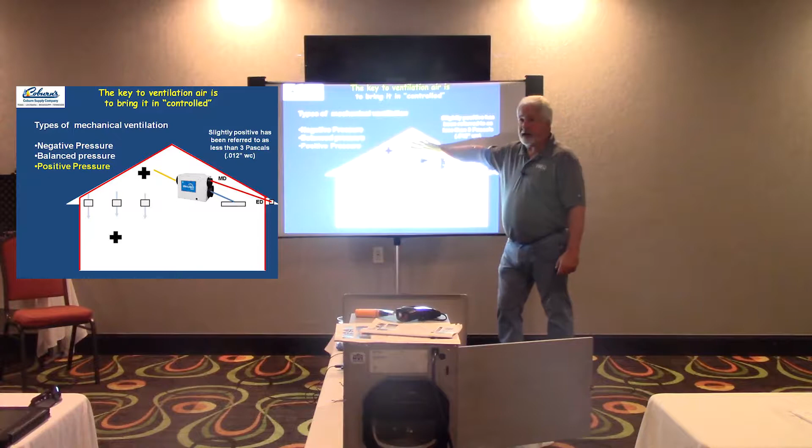Okay, does that make sense? Good, because then your attic becomes positive. Your whole ceiling, we want it to be Swiss cheese. I want those can lights that are not insulated in a foam house. I want that, because now that air, since it's positive, is going to force its way back through there and then back down into the space.

And I'm going to turn this over. What's going to be the temperature in the attic space compared to the house? Virtually the same. What's going to be the relative humidity in the attic space compared to the house? Virtually the same. Is that making sense?

So the building scientists are saying this: in the South, a tight, well-insulated house is more likely to have problems with higher indoor humidity than older, leaky houses. We said that, as soon as you close that ice chest, it gets nasty inside, right? Air conditioning runtime is reduced, especially during the shoulder season, so we don't dehumidify. Less time to run means the interior is dehumidified less. Adding mechanical ventilation only makes the situation worse.

Two researchers, if you're going to read up on any indoor air quality, these are the guys you want to pay attention to: Max Sherman and Ian Walker. They wrote that the use of an ERV did not change the humidity distribution in a hot, humid climate compared to continuous exhaust systems. Now they're saying negative pressure ventilation, and the ERV didn't even do better than that.

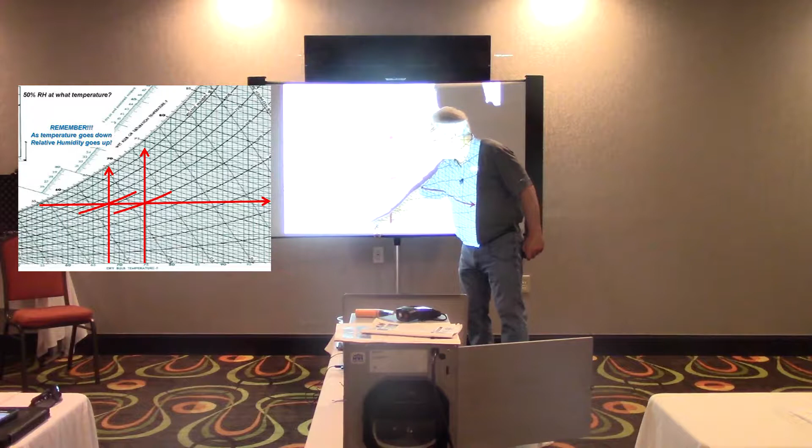But we also said Miss Homeowner doesn't want 75 degrees in her house. What does she want? 68 degrees. 68 degrees means my relative humidity is what? 63%.

So that same level of moisture in the house, because she dropped the temperature from 75 to 68, is now running 63% relative humidity. So she's going to call you up and say, oh, this thing's not working. It's 63% relative humidity in my house.

And your next question is, at what temperature? Because right now, 63% is fine. It's fine, because our dew point temperature is still that 55-degree dew point temperature. That's what we're shooting for in our marketplace. How much moisture do you have in the house? Does that make sense?

If she doesn't call you, what's she going to do to the thermostat? She's going to drop it down. And when she drops it down, now what's going to happen to my relative humidity? It's going to go up. Here's what I need you to understand now. Now it's 65 degrees in the house.

I have sheetrock right there. What do I have on the other side of the sheetrock? Insulation. I have insulation on the other side. I have a 76-degree dew point temperature in the attic space. I have insulation, and I have sheetrock. 65 degrees in here, 76-degree dew point on the other side. What's going to happen in that wall?

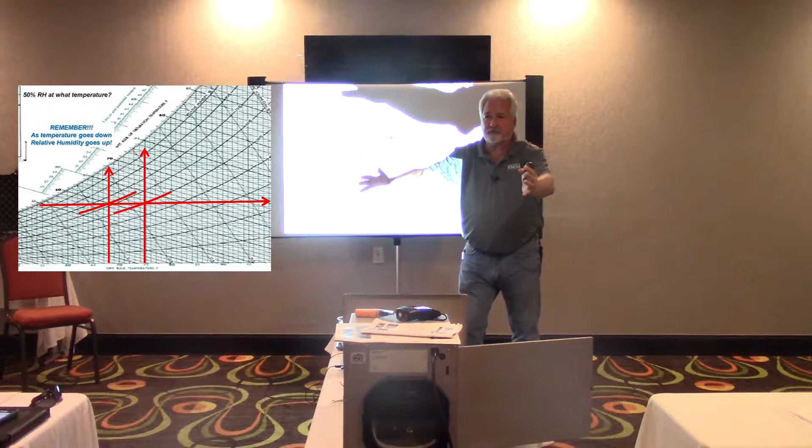Good. Because remember, insulation doesn't stop moisture. Tyvek, the moisture retarders, stop the moisture. If you don't understand that, take a handful of insulation, stand it up, take a hot pot of coffee and

set it on the top. Do you feel any heat? No, because it's insulated. Is that making sense? Pour it.

What just happened? Because the moisture runs right through insulation. The moisture travels right through. The thermal stays there. What's coming through that wall right there is moisture. And you saw the sheetrock doesn't do any good. Is that right? So that moisture is all the way up there.

You'll see that there's a lot of insulation out there that's installed backwards. They've got the paper, the kraft paper, right up against the sheetrock. Is that right? If I have sheetrock and then paper for my moisture barrier and then my insulation, I have moisture going all the way through my insulation, all the way to the paper. Is that right? I have 76-degree dew point still right at the paper, and now I have 65 degrees on the other side of the paper. It's going to condense inside there.

We need to have our vapor retarder on the outside edge in the deep south. You'll see as you move farther north, their vapor barriers are on the inside because they want to stop the moisture from leaving. They want to keep the moisture in the house. We want to keep the moisture from getting in the house. The vapor retarder changes. Is everybody good with that?

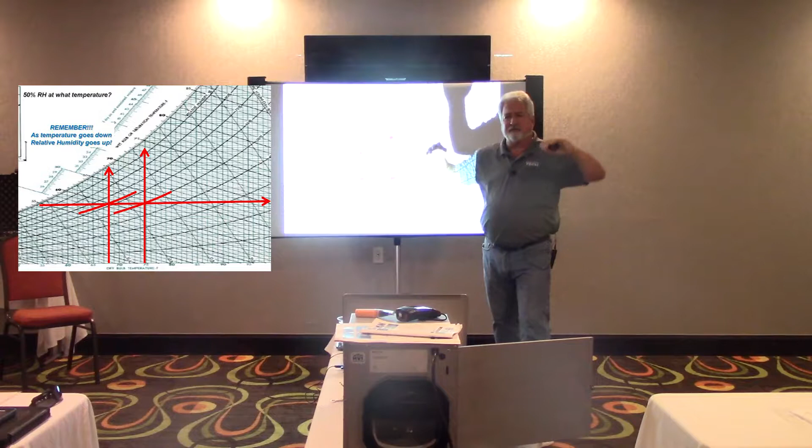Sweet. Notice those second floor units. When they have that second floor and all the walls of that second floor are in the attic space, is that right? And you've seen the insulation put on the side of it. Where's the Tyvek? On the inside.

There's no Tyvek at all up there, is there? No, they didn't put Tyvek. They didn't put a vapor barrier. They just got the insulation stuck in the side of that. What's happening upstairs? Wet to dry, is that right? It's pouring through there. And you're wondering why you can't get that upstairs dry.

Especially about outlets. Every day it's coming around outlets. Everybody getting that? Having that problem in a commercial building, we actually bring in radiant barriers to help with that. You don't want to.

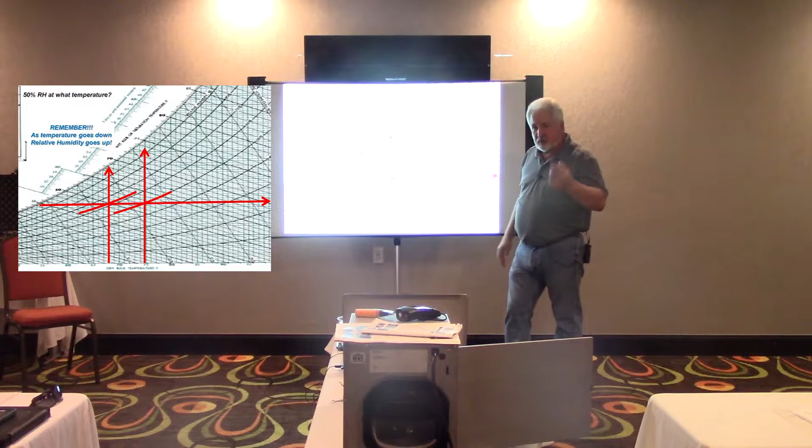Okay, so remember, guys, as the temperature goes down, relative humidity goes up. But it's relative, the moisture stays the same. So high relative humidities, guys, as we start getting up there above our 55-degree dew point temperature, because that's the number we really want to pay attention to, your bacteria start growing, viruses, funguses, molds, mites, respiratory infections, ozone production, all of that starts picking up.

Anybody remember FEMA trailers? Yeah. All of these things that are filled with VOCs, we put these cans in the hot, humid market. They off-gas faster in hot and humid, and we didn't bring in any ventilation air. So you just stuck Grandpa in that ice chest and you just walked away. You follow? It got ugly fast.

Dust mites. Anything above 50% relative humidity, dust mites thrive. They live, they like it. Dust mites eat your dead skin that flakes off, and whatever goes in must come out. That's right. So it's been reported that after 2 years of pillow usage, 33% of the weight of that pillow is dead dust mites and fecal matter.

He says, absolutely. So that's 2 years of pillow usage. How long has he had Scooby?

So you're understanding when the allergists say, take away the stuffed animals, this is exactly what we're trying to do. Or we need to keep it below 50% relative humidity, because if I can keep it below that, dust mites can't live. They dry up, shrivel up, die, they're gone.

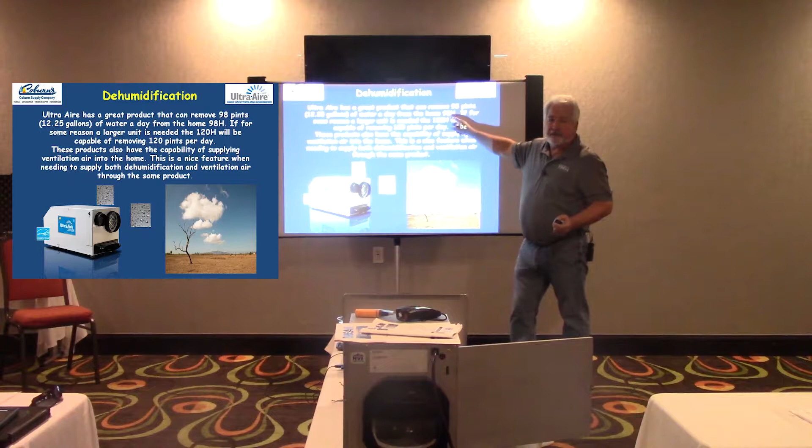Okay, so you're going to be looking at the model number and finding out the 98 pint. Remember, there's some formulas out there that are asking for pounds. 1 pint, 1 pound. There's 8 pints in a gallon, and about 8 pounds in a gallon. So just know that you can interchange those numbers.

Compare products out there. What you want to start paying attention to is you're looking for a high efficiency dehumidifier. High efficiency is going to be down here on the efficiency. How many pints per kilowatt will that dehumidifier remove? So in this case, that 70-pinter will remove about 5 pints per kilowatt. The 98 removes 6.1 pints for every kilowatt. More efficient, is that right?

Good. Then we go from the 98 to the 105. When I shift to the 98 to the 105, it's virtually the same amount of moisture that it'll take out. Is that right? But it's going to remove 8.8 pints for every kilowatt that we use. And you're paying about 10 cents a kilowatt. This is going to take out almost a gallon for every 10 cents of runtime. Does that make sense? Good.

There's other ones out there. The 150 is a high efficiency as well. And then the 205. They're good pieces out there. But if you're going to start looking at how do I do this?

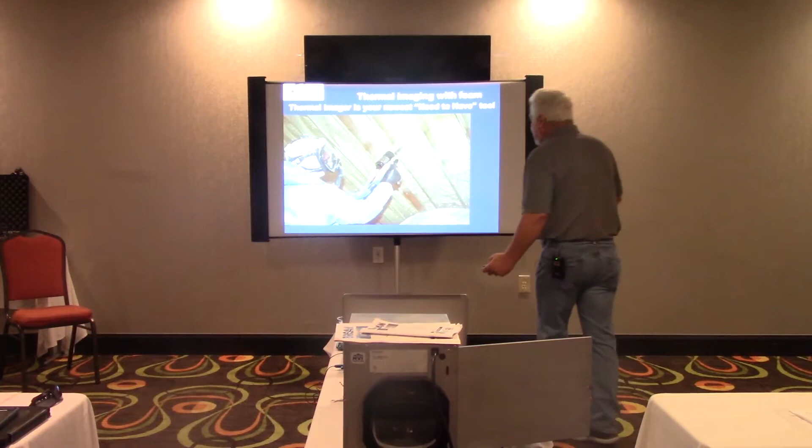Homeowners left - there were no dishwashers going, no showers going, nothing going. So where do you think we got that heat and moisture from? This was all coming in through the foam, through a bad foam job. We took a thermal imager, turned it on, and just started looking around in the attic space, and there was nothing but holes everywhere, heat pouring in. And if heat was coming in, what else is coming in with it? Moisture. You guys really need a thermal imager. If you're using foam, you can't see where the heat's coming in until you use your thermal imager.

And then all of a sudden you're seeing where all the heat is everywhere in that house, and we're seeing bad foam jobs everywhere. So please, please be careful and go look. It looks great like this, but it's not so great when you look at it like this. So use a thermal imager, get something out there to protect yourself, because if I see heat coming in, what else is coming in?

Moisture. Shouldn't the foam guys have them too? Oh, wait a second, they're not going to do that. They're already cutting their jobs. Should they? That's a big question. Should they? Yes, they should. Probably.

90% plus of foam jobs never get thermal imaged after they're done. Well, I can promise you they're not. But you guys are counting on a certain amount of R value on that foam, because that's what you sized your equipment for. If you're not verifying it, nobody's verifying it. I'm telling you, time to get into the thermal business, because now you're not guilty until proven innocent - I mean, you're not innocent until proven guilty, you're guilty until proven innocent.

Most of the problems we're finding with foam is the pockets between the roof line and the foam itself. They get an air pocket, and as the foam starts to dry, it opens this pocket. There it is, and your moisture develops right there, and then you get this rot through. We're seeing holes over the patio, because they'll foam up over that, and then they have to go out there and run a ceiling fan out there. So they cut a big hole in the foam to go out over that, and now you just have a huge open window into your conditioned space.

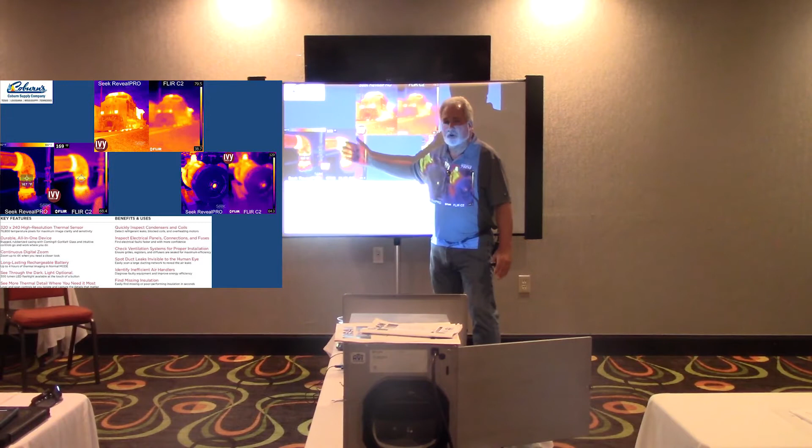Android version versus iOS, you do have that capability. Just to give you an idea of the difference - I love my C2, my FLIR C2, I love it because it gives me a good picture. But getting the difference between what we're selling with the C2 to what we're dealing with now with the Reveal Pro, it's a huge amount of difference. Look at the wheels on the train - you kind of figure out that around and around, so you can kind of see what it is, but here it's very, very clear on what we're dealing with. So again, it's the number of pixels that we have available.

I hope you all learned something from the class. I hope you enjoyed it. If there's something I can ever do for you.